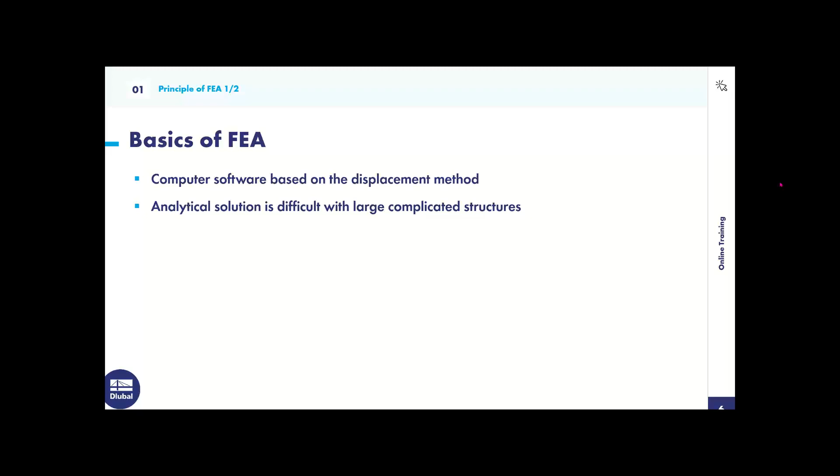The structure within an FEA is converted to a finite interconnected element mesh, and then the material and cross-section properties are given at each finite element node. Once that's done, the mechanical behavior is transferred between these elements.

A word I'd just like you guys to remember or walk away with is discretization. This is where the structure, or the submeshing, is being submeshed into finite elements.

Now we can go through the FEA calculation workflow. First, the determination of the local element stiffness relations, or properties, is determined. Then the program changes the stiffness relation at each node to the global coordinate system. Then the entire structure is assembled. Fourth, the support conditions are implemented into the structure. Then the displacement vectors are determined. Lastly, the support forces and internal forces are then determined.

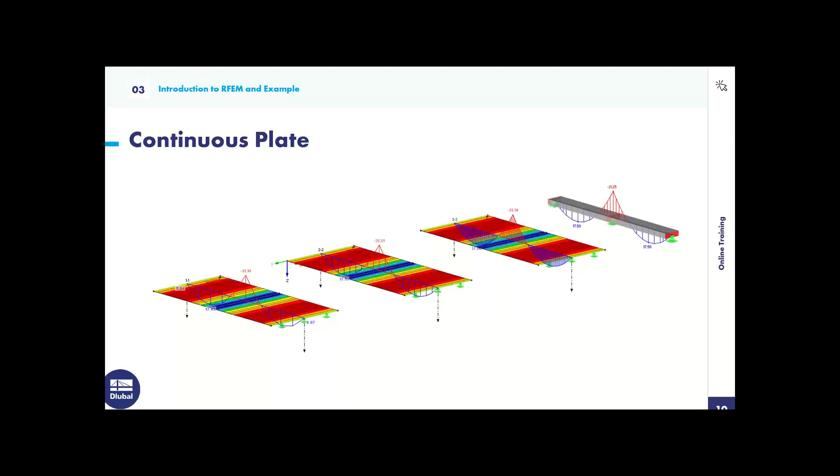So to start off, RFEM is a structural analysis software capable of analyzing plates, members, and solids. Deformation, stresses, and internal forces can then be calculated for a 3D structure.

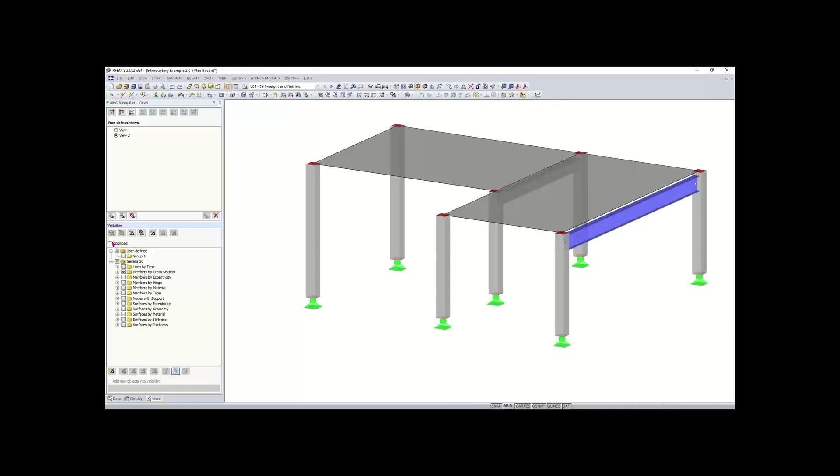So within our views tab, we can create visibilities based on these options down here. So if we turn on visibilities, we can create visibilities based on member cross-section. So right now, if I only wanted to show my W18x50 here, I could do that.

Maybe I only want to show my rectangular columns here or rectangular cross sections, my 12 by 12s. We can do that as well. And then you can also save visibilities as well, and then pull them up whenever you'd like.

The third tab we would have is our results tab. So if I just run the results for this model quickly, then we will see our results tab, and that will pop up at the bottom here only if we have results ran. So I just ran my load case 1, and if I turn off my visibilities,

and then now you can see in my results tab, this is again similar to the other menus where we have our expanding and collapsing folders. So right now I have global deformations checked off, and we're viewing our resultant deformations. And you can see we get a nice look at that. And then we can also check out our member basic internal forces, as well as our basic internal forces for our surfaces as well, if we would like.

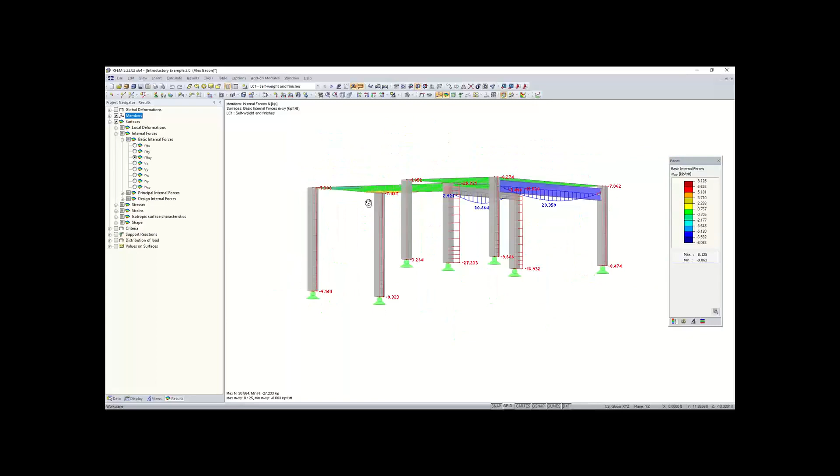If you don't have a scroll wheel on your mouse for some reason, you can use the arrow keys on your keyboard to move the model around in translation. You can also hold control and use the arrow keys to rotate the model as well. And then if you want to zoom in and out with the keyboard, you can use the plus and minus buttons as well.

One more thing before we get into modeling, I would like to just go over highlighting. So real quick, if you highlight from right to left, this will give you a purple box, meaning that anything that touches this purple box will be highlighted and selected. Highlighting from left to right, only things that are fully engulfed into this red box will be selected. So that's the difference between the two highlighting boxes.

So now, before we go into, I can go back to the PowerPoint. And I just have another question to ask before we get into the model. So the question is, what is RFEM? And then the options from A to C are listed. So if you could just answer that, and I'll give you about 30 seconds to a minute.

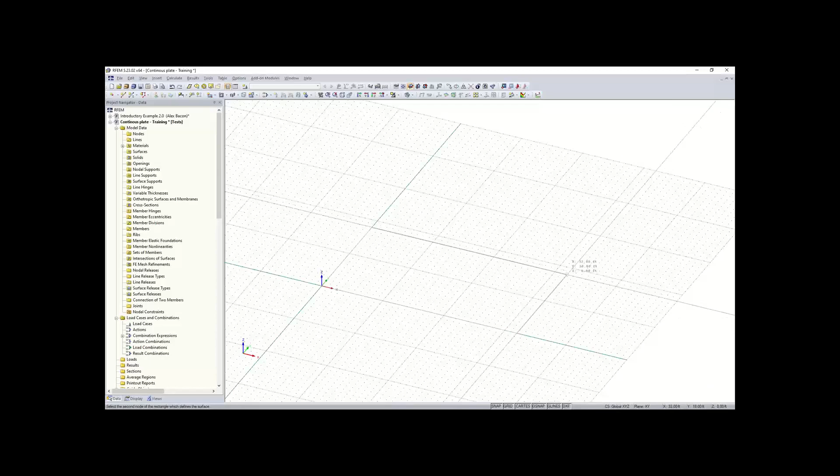So I'll go 32 feet in the X direction, and then 16 in the Y direction. And then I can just click, and you can see that this surface has now been created.

One thing I did want to change, so if you need to edit your surface at all, or anything that you place within RFEM, you can easily edit it by right-clicking on it and going to edit, or you can also just double-click on it. So I do need to change the thickness of this plate to 12 inches. So I can easily just do that by simply double-clicking on it, and you can also see you can change your material and other things as well. So I'll click OK.

And now we can create the same plate again above this original plate. I can just go up here to my rectangular surface tool again. I can click OK. And now I'm going to model a second plate 5 feet above this one. And then I can click and just drag my cursor, make sure that this is 16 feet wide. So that will be right there. So now we have our two plates here modeled within the XY plane. We'll go over work planes later in the training.

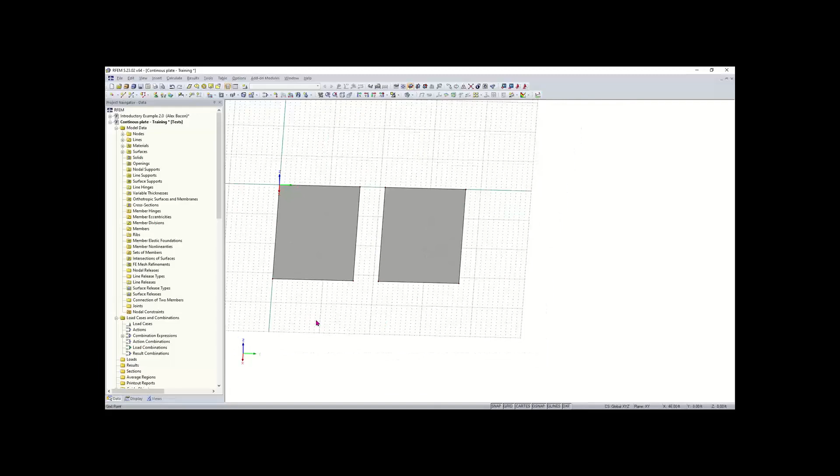So then we can simply create a third plate pretty easily. And to do this, we can use our move and copy tool. So what I can do is I can rotate here, and I can simply just highlight the second plate, and I can right click on it, and I can click move/copy. And what this will allow me to do is I can make a copy of this plate and then just move it wherever I would like using displacement vectors here. What I'm going to do is use this select 2 points and return, and this will give me a displacement vector by selecting the 2 points graphically.

So now I can just simply create one copy of this plate, and then I can create a displacement vector graphically, and I'll select my bottom corner here, and I would like this copy to be 5 feet above this plate. So I'll click that, and I'll click OK. And now you can see that the copy was made, and it was made based on that displacement vector that I selected.

So the next thing we want to do is now we can create our continuous beam. And to do that, basically we're just going to be creating our member. And you'll see that my plate is hanging off the edge of my grid. So to change the amount of grid points that you have, or to expand this grid, we can simply go up here to our settings for our work plane. It's not really a tool. We can click on this.

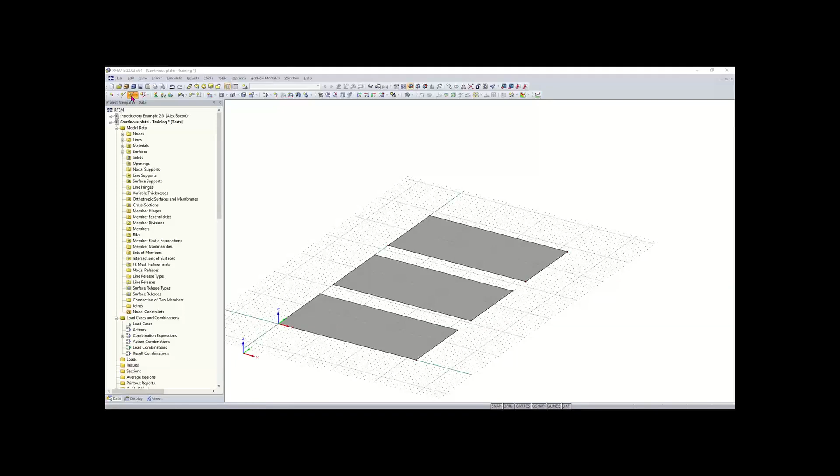And then once we click on that, we have our new member dialog box here. And we have basically a lot of information, but the one thing to focus on is just to input what our cross-section is going to look like. So we can just go over here to this button called Import from Cross-Section Library. We'll click on that.

And then this is similar to the material library, but you can see that we have our cross-sections here. We have rolled, built-up cross-sections, parametric thin-walled, parametric massive, and parametric timber cross-sections, as well as some other options down here as well. Right now, we'll just be focusing on our rolled I-sections here.

Actually, my mistake. We will not be using the rolled I-sections. We're going to be using the rectangular parametric massive sections right here. So we'll click on that. And then once I click on that, you can see that I can enter the parameters for my cross-section, like the dimensions. So I can enter what the base is going to be, which is going to be 40 inches. And then my height is going to be 12 inches.

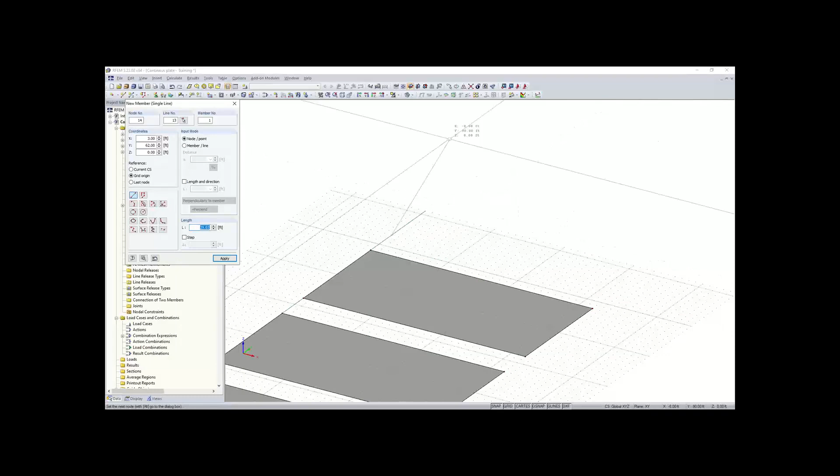And I'm going to add this beam 5 feet away from my third plate here. So I'll left click, and now you can see that I can just draw, you see this line here, I can draw my beam, and it's going to span the same length as our plates here. So I'll left click again, and now you can see that our beam has been drawn. And now we have our 3 plates and our continuous beam right here.

So the next thing we want to do is we want to divide these lines here on the edge of our plates, so we can add a midspan here for supports. We also want to divide this continuous beam, so we can add a middle support as well. So to divide the lines, we can simply just right-click on the line. And again, when you right-click anywhere or on any object, you get this shortcuts menu. So we can just right-click on this line to divide it. And then we want to go up here to divide line.

And you can see under divide line, we have multiple options for dividing a line. So we can do it by distance. And you can see when I pick that divide line option, we have these gray arrows here on your lines. And these arrows tell you the orientation of the line or the direction that you drew the line. So this would be the start, and this would be the end of the line. You can also view these arrows by just hovering over any line that you've drawn.

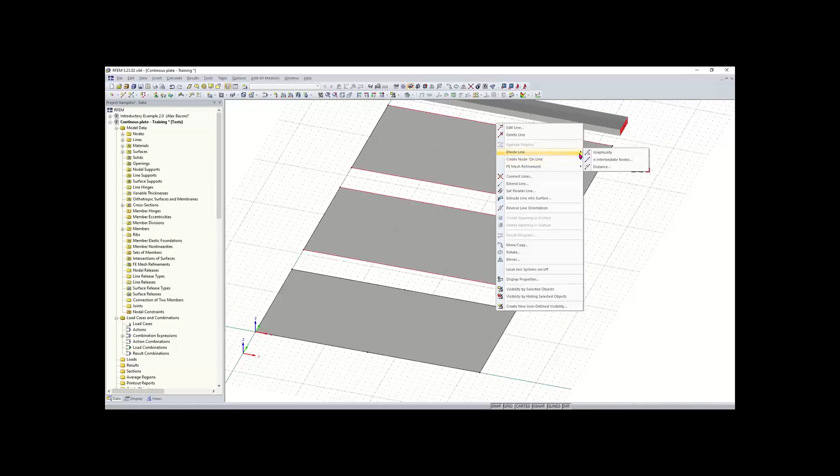So now we can do this for the rest of the lines, and we can easily just hold Control and select the rest of these lines here. Right click. So holding Control and selecting options will allow you to select multiple options. And then we can just do this by a distance again. Everything's set here. You can see the multiple lines have been selected. I'll click OK, and now we have these nodes placed in the middle of our lines here.

Now we would just like to divide our continuous beam up here. It's similar to the lines. I can just right click on the beam, go to divide member, and the first option would be graphically. Graphically just allows you to select graphically where you'd like to place the node. I'm going to place it right in the middle here at 16. And now you can see that our member here has been divided. I'll rotate the model to get a better view.

Now that our members and lines have been divided, for our plates, we can draw a line down the middle of them. The reason we are putting this line down is to later on add a line support there, so we have some mid-span support. So we have an option up here called New Line, right next to our New Single Member button. So I'm just going to click that.

Now you can see this box opens up here, and what we can do is just draw our line within our work plane here. I'm just going to select snap to and select this first node here, and then I'm going to draw it and snap to the second node. You can see we have a nice perpendicular symbol there, letting me know that the line is perpendicular. I can right click anywhere or hit escape to exit out of that tool. And now you can see that our line was drawn.

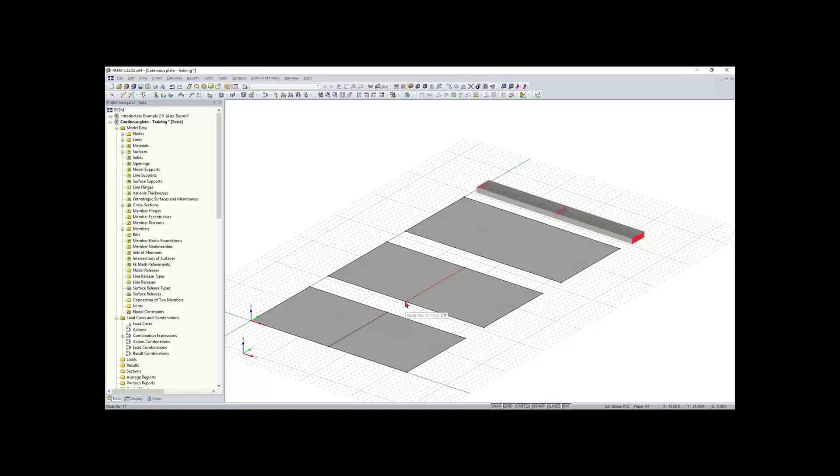So now we can add in the nodal and line supports. First off, we'll add in our line supports for our plates here. To do that, we can go up here to New Line Support. This line support is going to have certain conditions to it, so we can click on this button here called Create New Line Support. You can see here that we have our support conditions down here. Basically, this first section is for fixing your conditions in translation, or you can also fix your degrees of freedom in rotation here.

For this example, we just want the rotation fully released. That's basically all we need to do here in this box. So this will be just a hinge support. We can click OK, and OK again. Now I can simply just click on my lines here, and I can click on the outside here to add supports to the ends. So we'll have two end supports and a mid-span support. And now our line supports have been added to our plates here.

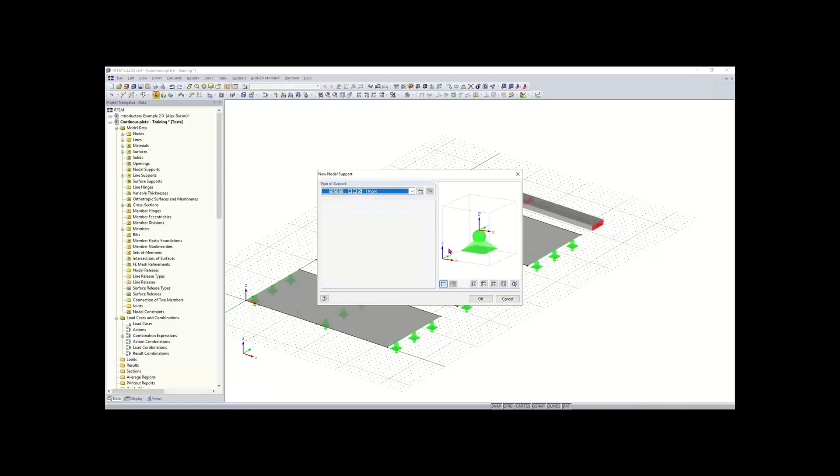Now we just need to add nodal supports to our beam here. We added line supports to our plates; now we want to add just nodal supports. To do that, we can go up here to New Nodal Support. You can see by default that hinged is already selected here, so instead of having to create a new nodal support type, we have hinge selected already. So we can hit OK. Now we can select our first end node here, and then we can select our middle support.

This last end support is going to have different conditions than these two supports here. So we can go up to nodal support and create a new type of support. This support will be the same as a hinge support, but the rotation about the local x-axis will be restrained. I'll click OK again, and now you can see that that support is a little bit different. It can't rotate about the x-axis, so it's locked. And now all of our supports are defined.

So now that our supports are defined, we can get into loading. So now we would like to load these plates in this continuous beam. It is important that we create a new load case because every load within RFEM needs to be assigned to a load case. So I can go up here to either edit load cases and combinations, or we have a button here called New Load Case. So I'm going to click on the New Load Case button.

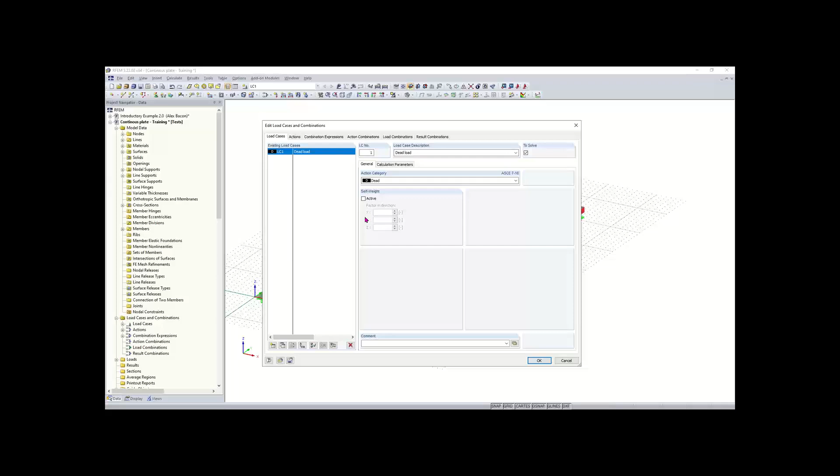So now you can see up here we have our drop down telling us which load case we're under, and you can see I had load cases and combinations automatically generated based off of standards. So now the program has generated some load combinations and result combinations, but we don't need to worry about that right now. We just want to stay under the dead load so we can add loading to these plates and continuous beam.

So the first thing we want to do is create a new surface load for our plates here. To do that, you can see we have a couple loading options right here below dead load. We have some point loads, some uniform loads for members and lines, and then we have a surface load. So we want to click on this new surface load here, and this dialog box will pop up. Again, we can just work through these different sections. Our load type will be a force, our load distribution will be uniform, and for our load direction, you can pick from a couple options. We'll keep ours as global related to the true area in the global Z direction.

Just a quick thing to point out: if you ever see lowercase coordinates, those relate to the local axes, and the global axes are the capitalized coordinates here. So we'll keep that as the global Z coordinate. And now we just want to add a magnitude to our load. This will be a magnitude of 0.21 KSF. And now we can click OK.

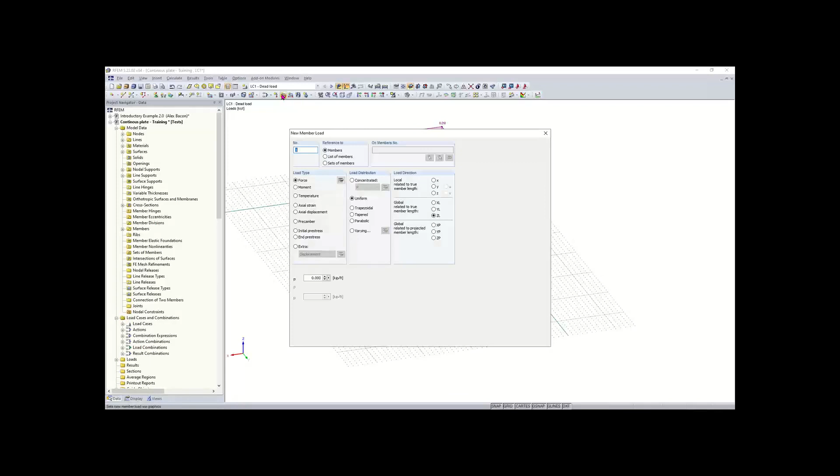And again, this is similar to the surface load, where we will have a force as the load type. The load distribution is going to be uniform, and the load direction, again, is going to be in the global Z direction. I'm going to add in a magnitude of negative 0.21 kips per foot. I'll click OK. And now you can see that my cursor has changed, allowing me to select my two members here.

And now we can just right-click anywhere to exit out of that tool.

Hey Alex, we have a quick question. The question is, how can you quickly edit the load? Let's say you put in the wrong load magnitude. Maybe you can show how to quickly make changes to a load you've already drawn.

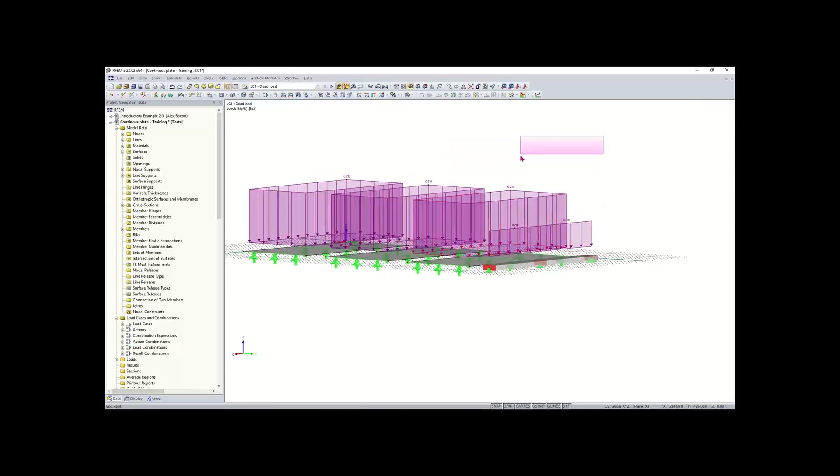If you've drawn your loads and want to edit them, you can simply double click on them, which allows you to edit just one load. Also, if you need to highlight all of your loads or a couple at a time, you can highlight them and then double click on them, which allows you to edit them.

Great, thanks. You're welcome. Now that we have our loading, we can move on to creating FE mesh refinements. Within the program, for surface elements an FE mesh is generated, and right now our FE mesh is set to about 1 foot for the length of our finite elements. We'll get into more of that later if you're confused, but for now we'd like to add an FE mesh refinement, which allows us to change how fine our FE mesh is for individual surfaces.

To do this, I can simply right click on my surface here, go to FE mesh refinement, and then click on new. I'll create a new FE mesh refinement using this button called create new FE mesh refinement. You can see that surface 1 is selected, so I'll click on that.

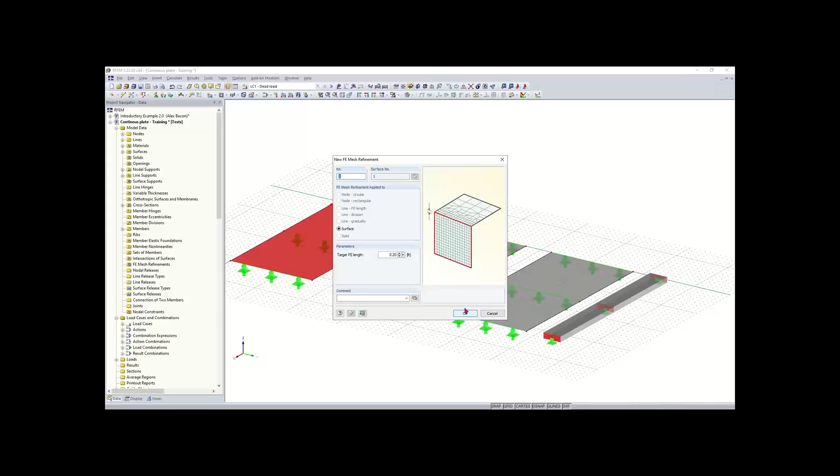Right now we just have the surface selected automatically by the program, and we can set our target FE mesh length. I want to set mine to 0.2 feet. This is smaller than the 1 foot default already selected globally in the program, so I'll click OK, then OK again. Now you can see this icon telling us that an FE mesh has been applied.

Now we want to do the same thing for our other two surfaces. We can right click on the surface and add one, but we can also go into the project navigator on the left hand side, scroll down to FE mesh refinements, expand that, and you can see we have one for surface 1. I can right click on FE mesh refinements and click new FE mesh refinement.

Now I can just click on surface. It's asking what surface I want to apply this to. I can type in the surface number, or select the surface graphically. I'll click OK.

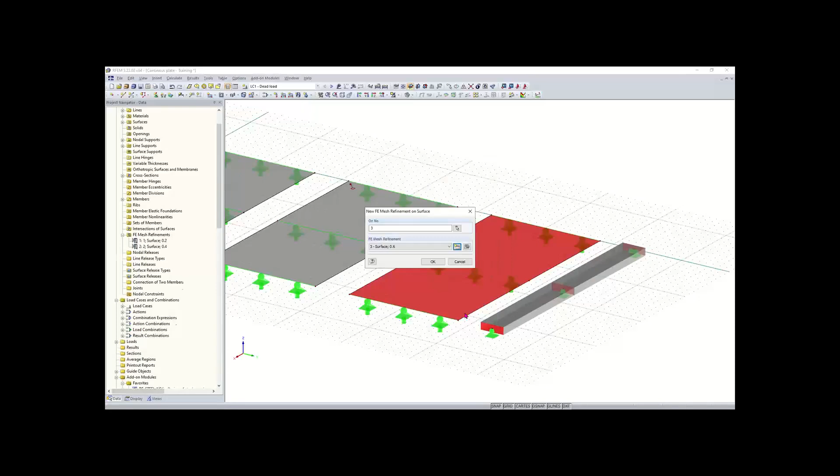For this surface, I just want to increase the FE mesh refinement so we can get an idea and compare results later on to see how our results change depending on FE mesh length. I'll click OK, and again we get that icon. Then I'll do the same thing for the third surface, right click on it, create a new FE mesh refinement, and make this 0.6 feet, so you'll see they'll be increasing down the line. I'll click OK again, and you can see that icon has been placed there.

We have another quick question unrelated to the FE mesh, which maybe you can address quickly. One of the attendees noticed that you selected concrete for one of the materials. They're wondering, what does the RF concrete add-on module do then? How is the add-on module different from RFEM, I suppose, is what you could quickly explain.

Basically the material for concrete has been selected with RFEM here. You'll see later on when I run results that in RFEM you just get things like global deformations, internal forces, support reactions, etc. But if you want to design rebar, to design your slab for reinforcement, that's when RF concrete members or RF concrete surfaces come in. We have two different modules, one for surfaces and one for members. So basically the add-on module is for designing the reinforcement.

I would just add to that, like what Alex said, the analysis is completely within RFEM, and all materials are available to you there for full modeling for the analysis. Then, as he mentioned, the modules are for design. Within the RF concrete modules, you'd find the various standards, such as Eurocode, ACI, CSA standard, to actually do the reinforcement design, which is not done within RFEM.

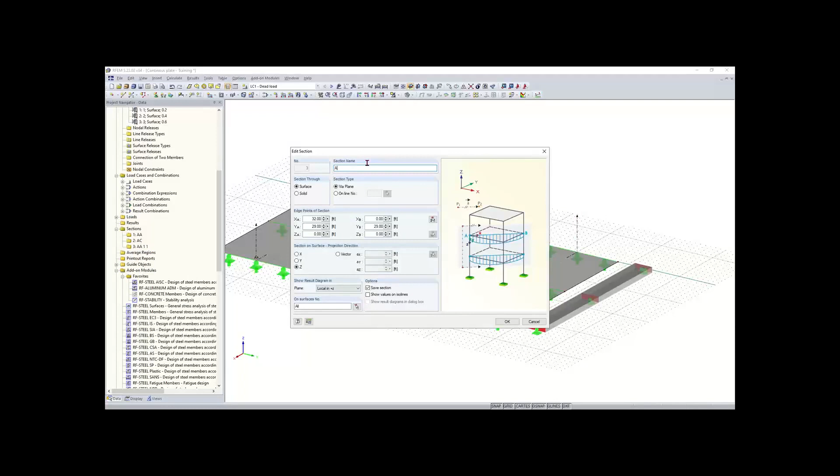Click OK, and now everything is basically ready for calculation. We have our surfaces and members along with our supports and loading. Again, you can turn off the loading—I don't have mine shown right now—but you can turn it on and off with this button up here. I'll turn it off for now.

Now we can go up to our toolbar and click the button called Calculate All. Once we hit that, the program will go through and run the calculations. It should only take about a minute or two, depending on the size of your model and its complexities.

Once this runs, the first thing we should see is our global deformations. Then we can get an idea of our internal forces and things like support reactions. Now you can see we have our global deformation shown, with a panel on the right-hand side that's basically the legend for our colors. We have a max displacement of 0.022 inches.

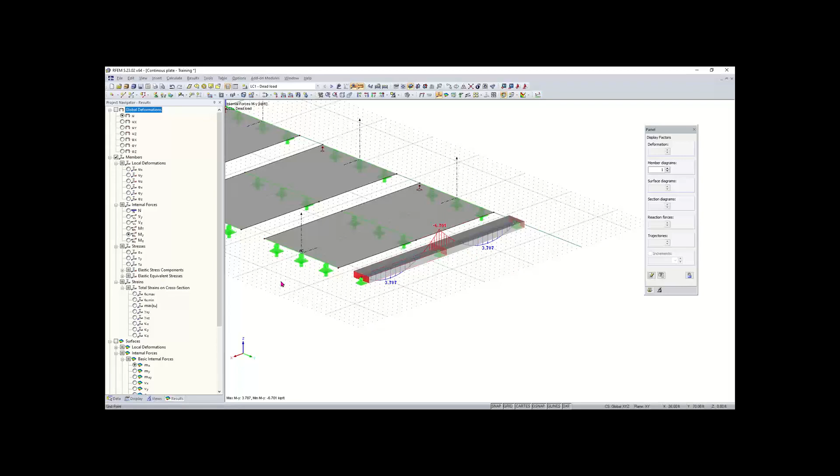And we can also take a look at our internal forces of our surfaces. So we can view the basic internal moments along the x-axis. Again, every element has a local axis, referred to with lowercase coordinates here. If I hover over any element, it'll give me the local axes for the plate. If we want to see the local axes of our member, we can right click on that and click on local axes, and now we will get that for all of our elements here. So I can right click again.

One of the attendees is asking how to find the optimal mesh for the analysis. Yeah, okay.

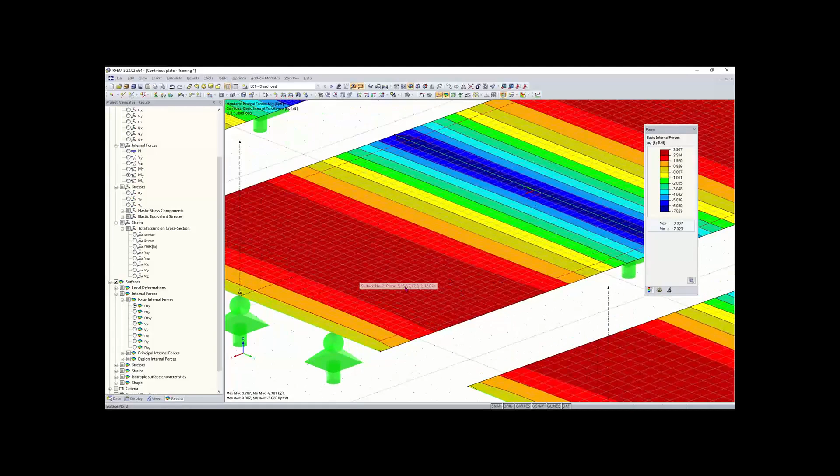So the optimal FE mesh for analysis is a little tricky. There's not an actual specific length that you would pick for your FE mesh for a certain model. Basically what you can do is adjust the FE mesh by going up here to calculate, and you can go to FE mesh settings. These are the global FE mesh settings for your model. Here we have our target length of finite elements, and you can change this. So basically finding the correct FE mesh is just a guess and check. You can take a look graphically if you zoom into your model at the FE mesh and just make sure it looks good. But then also you can run the results of your model with a certain FE mesh length, and then change the FE mesh length or make it finer, and run your results again and compare those results and see how much they've changed. You can just keep doing that until your results don't change, or the difference between your change results is small.

Yeah, exactly as Alex mentioned, it's basically just running a test and trial type process where you continue to decrease the FE mesh. Exactly as he says, if your results are changing significantly, then you know your FE mesh is not refined enough. The other thing I wanted to point out, if Alex, you can go to calculate FE mesh settings again, the third tab is called adaptive mesh refinement. This is something we're not going to get into today, but essentially the program will run that testing process for you. You can set the number of iterations, the load case or combination to consider, and the program will run a quick analysis in the background, check the results, and then refine the FE mesh in certain areas of the model, essentially creating the FE mesh that is optimal for your model. So this is a way to automatically do it. To manually do it is exactly as Alex had mentioned. So hopefully that answers the question. Thanks, Alex. You're welcome. Yeah, that's awesome to point out, it's a good tool to use.

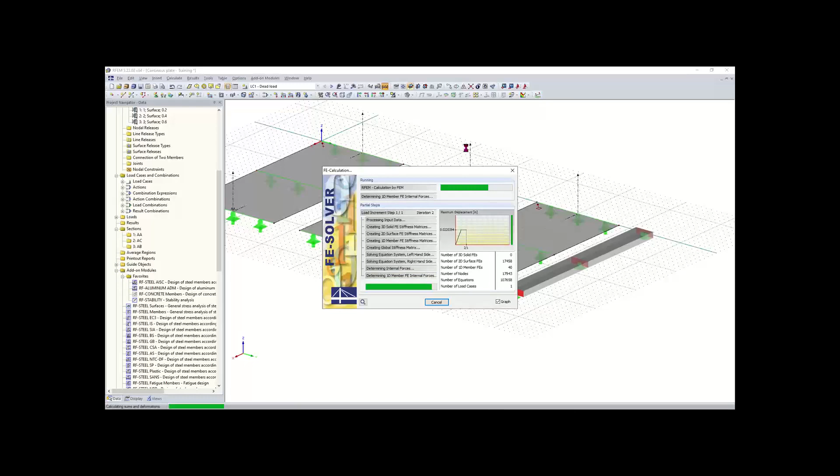So basically, this is because the methods used in school assume an infinite shear stiffness, when in reality there are some shear deformations for bending. So just keep this in mind when comparing hand calculations of deformations with RFEM.

So now back to the PowerPoint, we can go over some plate theory. So basically, these first theories are going to be analogies for beam elements. The first theory is Bernoulli's, and the second theory is the Timoshenko theory.

The assumptions made for Bernoulli's are that the cross sections always remain in plane and are perpendicular to the member axes. The second assumption is that there are no considerations of shear deformations, and that the shear stiffness is completely rigid for our member.

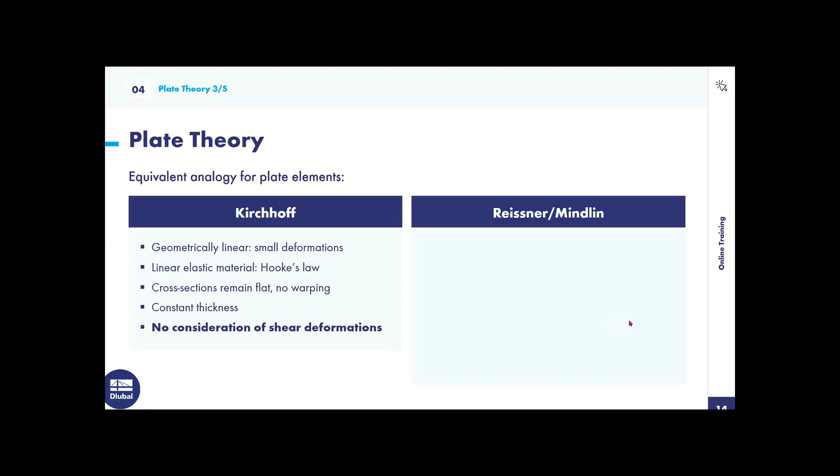For the Reissner-Mindlin theory, we assume basically the same as the Kirchhoff theory, but the only difference is that shear deformations are considered, and we consider transverse and lateral strains. If we move to the next slide, we can get a better look at what considering transverse/lateral strains means.

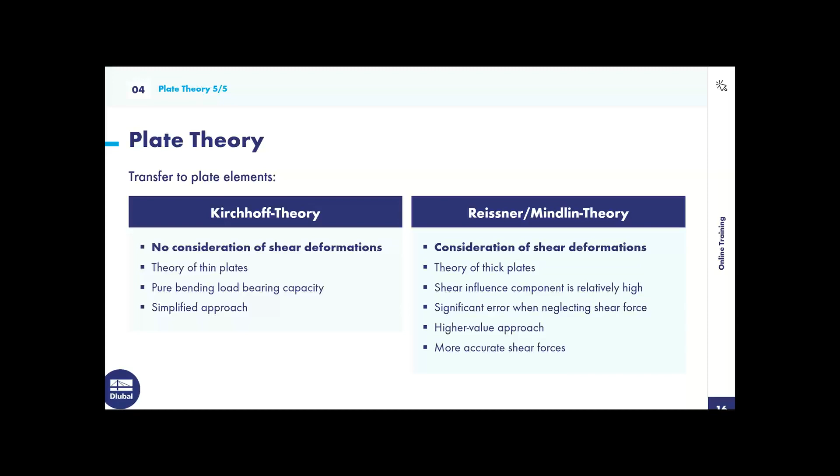So now what we can do is move back to the program. Within the program, we can go to calculation parameters. And once we open up calculation parameters, you will see that under options here, the plate bending theory is by default set to Mindlin. So this theory, like I said in the PowerPoint, takes into consideration shear deformations. So we can just keep that the same, or we can also change it and get a view of how the results change.

So we'll change it to Kirchhoff, and so we won't take into consideration shear deformations. Before we click OK, maybe get a quick glance of what these results look like. And then we can click OK. It's going to ask me to delete the results because I changed that theory. So I'll click yes. And now I'll rerun my calculation. It'll run the calculation based on the Kirchhoff theory.

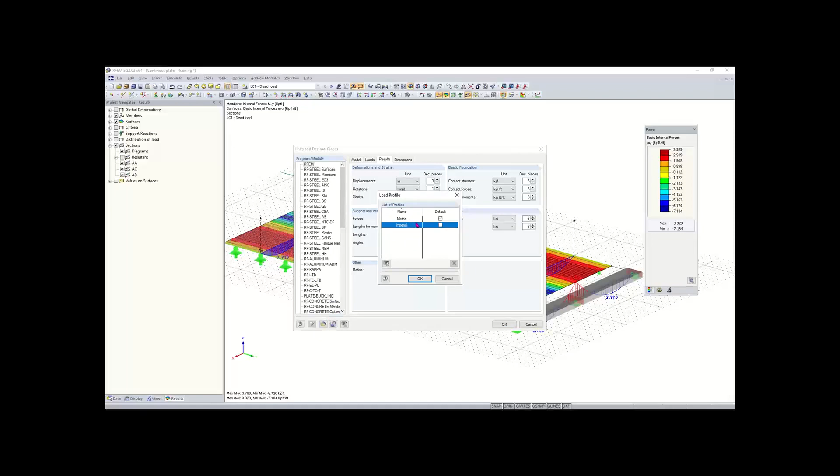So you can change the units of your results, and the units in general, by going up here to options, and then to units and decimal places, and this dialog box will pop up, and within here you can change the units of pretty much any result. Up here you have tabs, and you can go to results, and here you have deformations. You can change the results of your internal forces here. You have a drop down, you can change between any of these units if you like. You can also change your decimal places as well. And if you want to change between imperial and metric, you can do that at any time throughout your modeling as well.

So those results ran, and maybe you can remember a little bit from the results before, but you can see that they've changed slightly, maybe by 0.1 or 0.2 kip per feet.

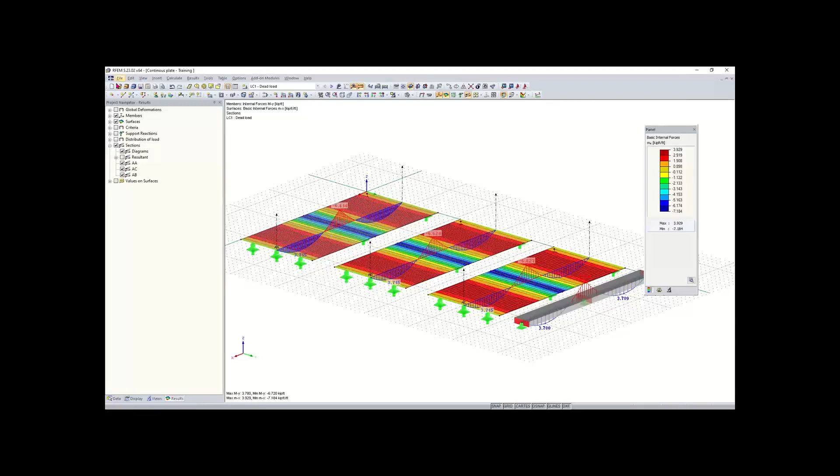So what we can do is we can open up a new model. We can also save our model for our continuous plate by hitting the Save Model button up here. And that'll save our model. And now what I can do is I can click on New Model.

And within this new model general data tab, like I said before, we can just type in our model name. So I'll just name this one Euler case 1, example training. We don't have to add a description. We don't really need to generate combinations automatically. So it'll also be a 3D model, and everything here is set by default, so that's good. So we'll click OK.

And now we have our blank workspace here. So what we're going to do is just create one single member, and this is just going to have a new cross section. So what I can do is go up here to new single member. I can click on that, and now I can create my cross section here again. So I can go to import from cross section library. And then it's going to be an I section. So I'm going to click on I section.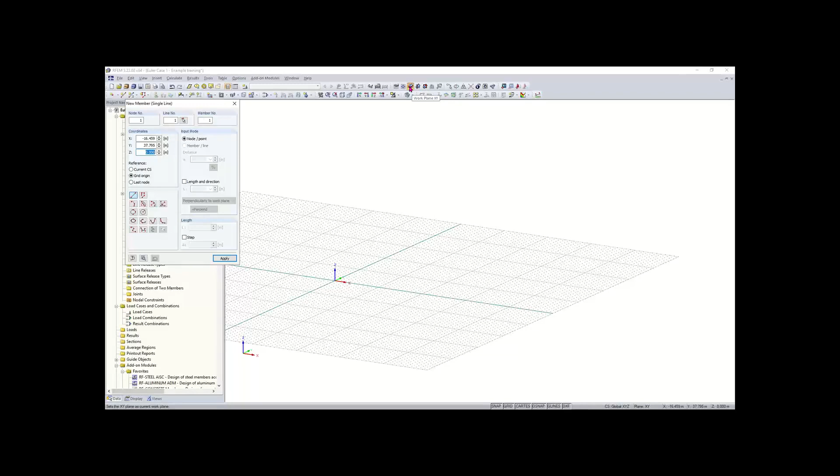And now I can draw my member. So maybe I want to draw my member perpendicular to this grid here. What I can do is I can check off this box here called length and direction, and I can set this perpendicular to work plane if I want to draw it perpendicularly. Or what I can also do is just change my work plane up here using these buttons. So right now it's set to work plane in the X and Y plane. I can change my work plane to the YZ plane, or I can change it to the XZ plane.

I'll keep it on the XZ plane, and now I can just select my origin here by left clicking, and I want this column to be 30 feet high. So what I can do is simply just go up here, left click, and now my column has been drawn. I can right click to cancel out of this, and now our column has been drawn.

So now the next thing we want to do is just add in a rigid support. So I can highlight from left to right this node here. I can go up to nodal support, and right now it's set to hinged. Instead of having to define a rigid support, what I can do is just hit this drop down and select rigid, and you can see that all of the degrees of freedom here from translation and rotation are all fixed with these check marks. So now I can click OK, and I can zoom in here and you can see that my rigid support has been added.

And now our Euler Case 1 has been created. And what I can do is create a new load case for it. So because I need to add in loading, I can go up here to new load case.

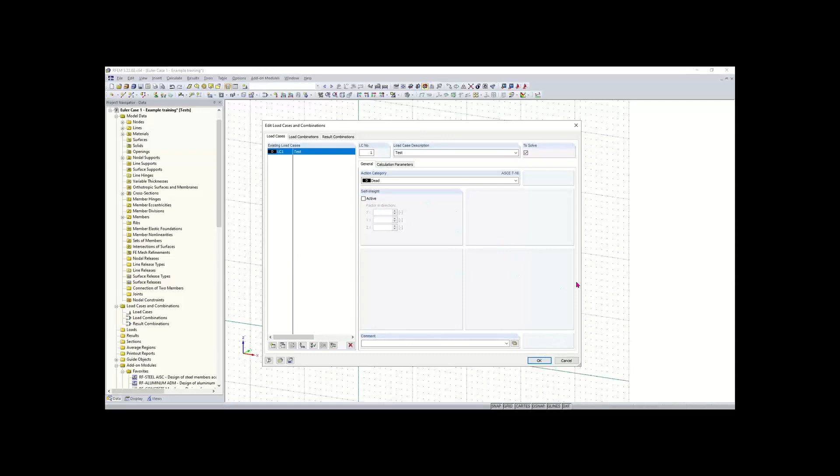And I can just name this load case test. And the action category is just set to dead. Again, we're going to deactivate self-weight just for hand calc reasons. Normally you want to keep self-weight activated at all times for design. So we'll click OK.

And now we can create our new nodal load. So to add a nodal load instead of a member load or surface load, we have a button here called new nodal load. We can click on that. And this box should look pretty simple. So we have our node selected up here. And then we just want to tell the program the force and what direction it's going to be in.

It also looks like I'm still in metric, I have kilonewtons, so let's change that down here in this units button at the bottom. So I'm going to just change this back to imperial. I'll click OK. Oh, it's asking me. Yep.

So for this load, we're going to add in a -5 kips in the z direction. And you can see that loading has been shown here in the graphic. And then also I want a lateral load in the x direction of 2 kips. So we'll add that. We'll click OK.

And it looks like I had my node down here selected before I went into my tool up here. So what I can do is I can just double click on this loading and change the node. Or I cannot change the node there, so what I can do is just drag this loading to this top node here, and there we go.

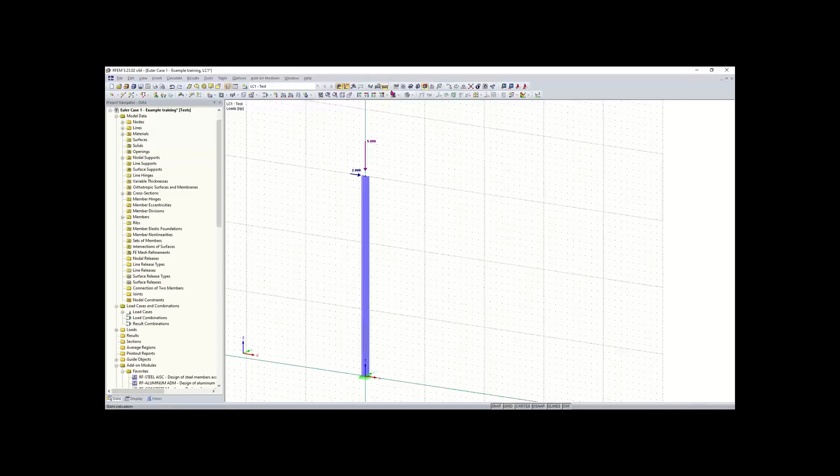And now what I want to show you is something important. This is very important for calculations of structures within RFEM. What I can do is click on Calculate All, and I can run the calculation for this column. And now you'll see that my deformation is shown here, my resultant deformation.

I can also go here to member and again show my internal forces. I can show my moment about the local y-axis here. I can get an elevation view of that. And we can take a look at our deformation in the x direction, 3.782. That's 3.782 inches. And now I want to show you how this linear or first order calculation differs from a second order calculation.

So just to clarify on that, if I go to edit load cases / combinations, and we're looking at this load case that we've just put loading on and we've created. If I go over here to my calculation parameters, you can see we get our method of analysis right here. So generally, load cases are calculated based on a first order analysis, and load combinations, which we didn't get into, are calculated based on a second order analysis.

And maybe you recognize this information from the name P-delta. So the second order analysis takes into consideration large P-delta and little p-delta. And what we can do is we can change our load case to a second order analysis. And then I can click OK after doing that. So basically a first order analysis defines the equilibrium of the beam based on the undeformed system.

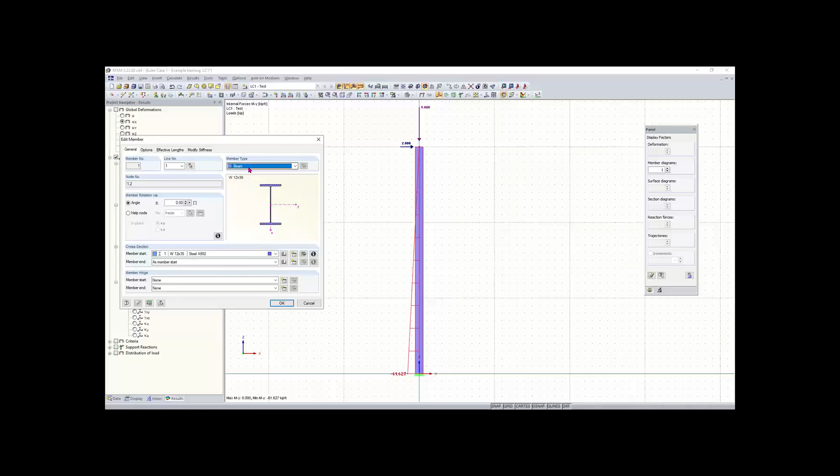Maybe we can quickly go over member types, just the basic ones. If I double click on my member here, you can see that my member type is set to beam. That takes into account beam or column. We also have rigid for infinitely rigid stiffnesses, and we also have ribs and truss members, but we won't get into any of these types today, but they're good to know. If you're designing or drawing a beam or column, always keep the member type as beam.

So now we can change the loads at any time. This will erase our results, but I'm going to change my loading to only 100 pounds in the axial direction. I'll double click on my loading here, and change this to 100 pounds or -0.1 kips. And I'm going to set my lateral forces to 0. Click OK. Now you can see that the loading has changed and decreased.

Hey, Alex, quick question. Yeah. I know you showed this at the beginning, but we had a question. If you could just review again how to automatically account for self-weight.

Okay, yeah. I know I've been turning off self-weight or not accounting for that throughout the training. But if you want to automatically take self-weight into consideration, I can go back into my load cases and combinations here. Under dead load, the action category will always have self-weight activated by default. What this means is for this load case, a -1 factor is going to be applied to the self-weight of the structure, and that's going to take into consideration that force being applied to your structure.

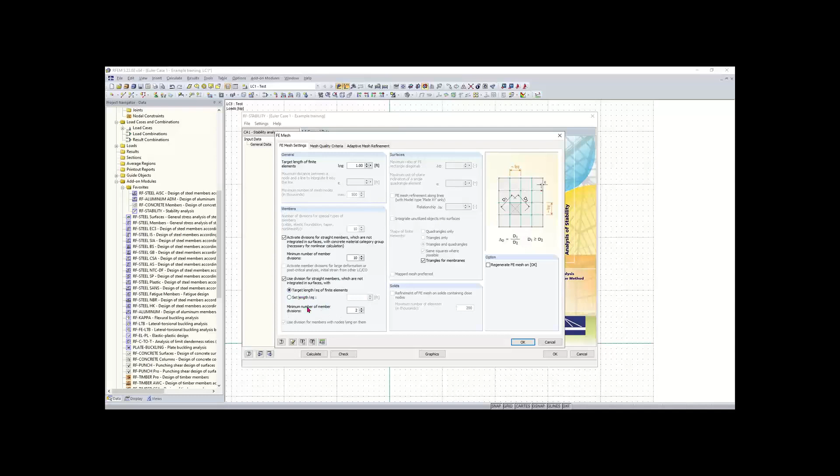To increase accuracy, the only thing I want to change within these options is the minimum number of member divisions. Instead of 2, we're going to set that to a value of 10. Then I'll click OK. Now we go back to our stability, which I did by clicking OK. It is important to change that value from 2 to 10. And now I can hit calculate.

So once I hit calculate, RF-STABILITY will take my internal forces, members, and cross sections of materials, and give me a load factor and a magnification factor here for my different eigenvalue numbers. The critical load factor is the amount you would have to multiply the loads by in order to get an unstable system.

Or you could look at it as a total percent of the loads your structure can take. So basically right now my structure could take 135 times more loading than it is taking right now. And then we have our effective lengths in the next results down here.

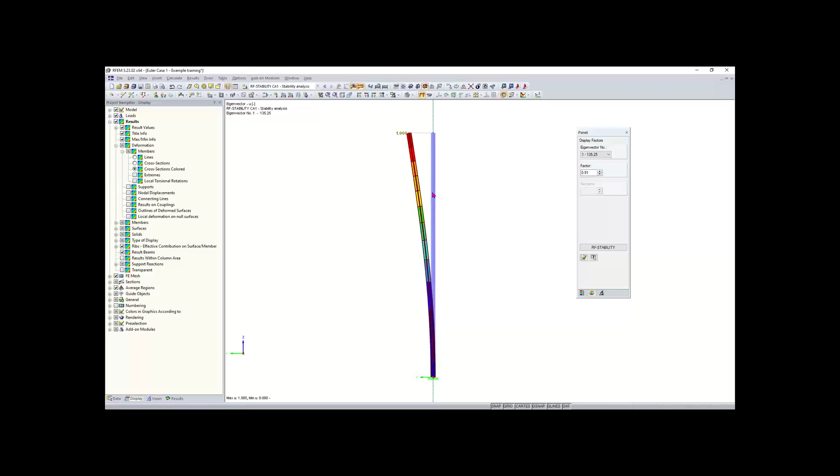I think it is clear also that the column will first be unstable in the weak axis direction. So basically the axis of this column is in the y direction, or about the local z axis. So what I can do for clarification is just turn on my local z axis. This is because the smallest moment of inertia is in the y direction, or about the local z axis.

And to double check that, I can double click and go to info about cross section, and you will see that my smallest moment of inertia here is about my z axis, 24.5 inches. That gives us an idea of our moment of inertia there, giving us our weak axes.

And now we can jump back to our stability by simply clicking on our stability here, and we can take a look again at our effective length factor by going to effective lengths and critical loads. So we have our weak axes and strong axes for both our effective length and effective length factor.

We also can show you what it looks like if the structure is unstable. So maybe you have a structure that's unstable because the loading is too high. For example, what I can do is click OK.

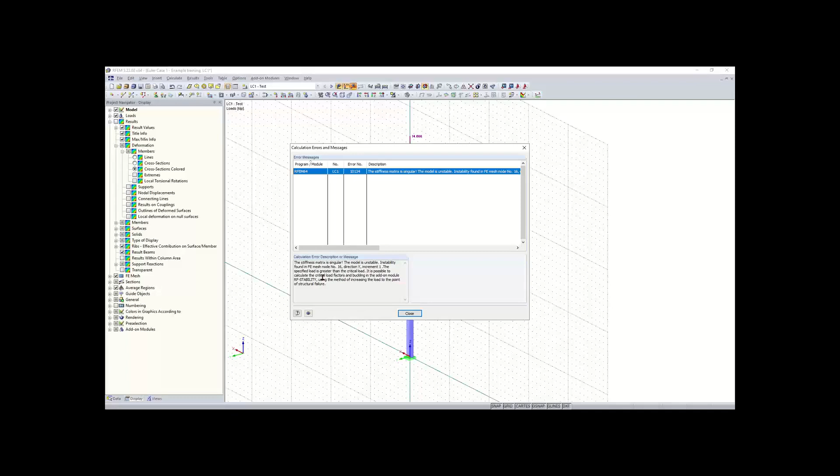Keep in mind, I also still have P-delta or second order analysis on, so you'll see something like this: an error message, calculation errors and messages. It'll say something like the stiffness matrix is singular, and it'll explain that it's not possible to calculate the critical load factors and buckling in the add-on module RF-Stability. So what we can do is close out of that.

The first thing you want to do is make sure that your load cases are being calculated based on a first order analysis. I want to change mine back to a linear analysis. So now that I've done that, I can jump back to our stability.

And within our stability, I can keep all this the same. You'll see that the load case/combination that it's referring to is LC1. I'll click calculate.

And now once that's done calculating, you should see that my critical load factor here is below 1. So basically, since my critical load factor here is below 1 at 0.966, that means that my structure can only take about 96-97% of the loading that is applied.

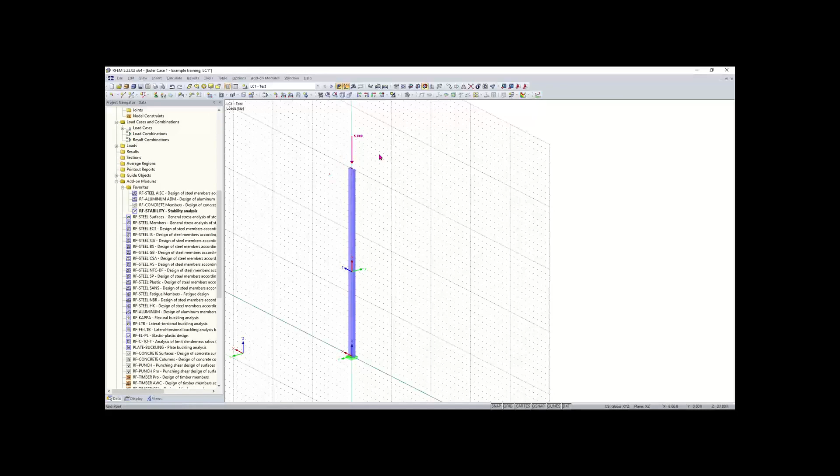Now I want to change the height of our column. If I want to change the height of this column, I can simply highlight this node, double click on it, and then change the height by easily changing the z coordinate to 10 feet. So this will be the height of our moment frame. Actually, before we do that, let's save this model—this will be our Euler case 1 model.

Then what I want to do is go to File. I want to save a copy of this model. I can save this copy as our moment frame. And then what I can do is open that copy.

And now we can turn this column into our moment frame. So I can highlight again this node, double click on it, shrink this to 10 feet. And now I just want to make a copy of this column. I can just highlight the whole thing, hold Control, and then simply drag this column.

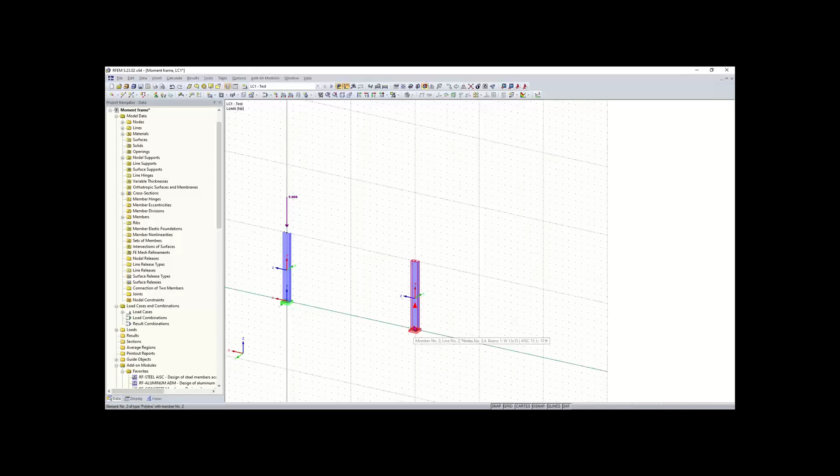I want to make that 10 feet in the negative x direction, or also we can change that—so I want to make that in the positive x direction, and it's going to be 10 feet away.

And then what we can do is create a beam spanning between our columns here. I can also just hold Control—actually, I can Control Z to undo that. What I can do is just hold Control and move this loading over. And now I can draw a beam that will span between the two columns.

This beam is going to be a W8 by 15, so I'm going to import that from our cross-section library. I'm going to go to I sections, and then go down to 8 by 15, leaving all these filters the same. So that'll be an 8 by 15. I'll click OK, and now we can draw our beam here.

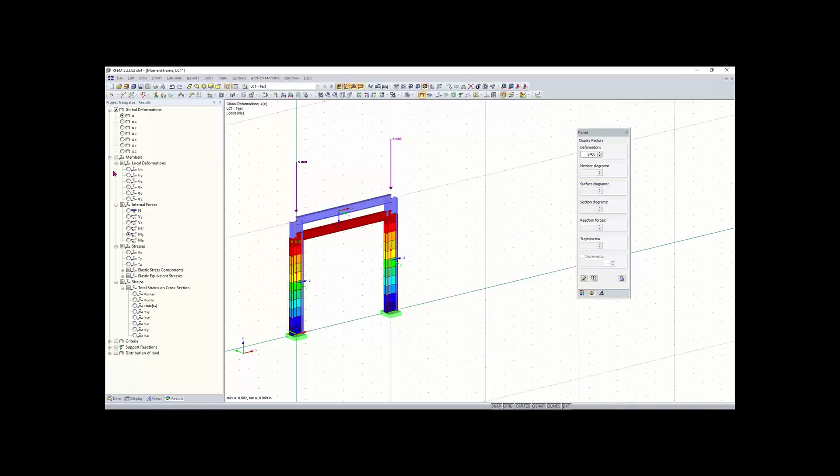And now we can get our global deformations and see what those look like as well. We can also take a look at our internal forces by checking off members here. So we can look at the axial forces.

And then if we want to get a better idea, we can also add in some lateral forces as well—so we can add in 2 kips in the x direction for both of these, and rerun our calculation.

So now we can get a look at our moments from our lateral loading, and then we can also go down here and take a look at our support reactions. So we have our support reactions here, and we can also get a look at our moment reactions as well. And those are defined based on the double arrows here.

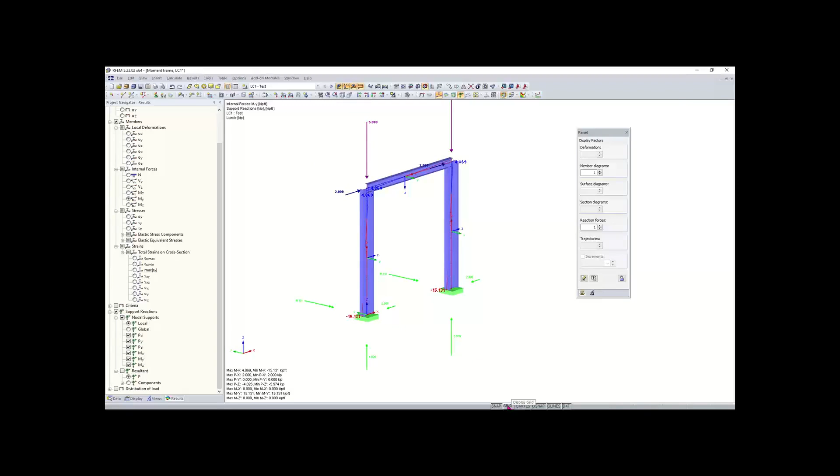Another good thing is you can turn off your grid as well if you just want a cleaner view of your results. You have these buttons down here to turn off your grid.

And then what we can do is go to our stability, and then we can take a look at our critical load factors. So we can hit calculate. And we can see that our critical load factor is pretty high, which is good.

We can check out our eigenvectors. We can get an elevation view of that, and we can cycle through these. You can see we have some out of plane deformation, so maybe this frame will have some lateral supports, some pinned lateral supports up here to keep it in plane.

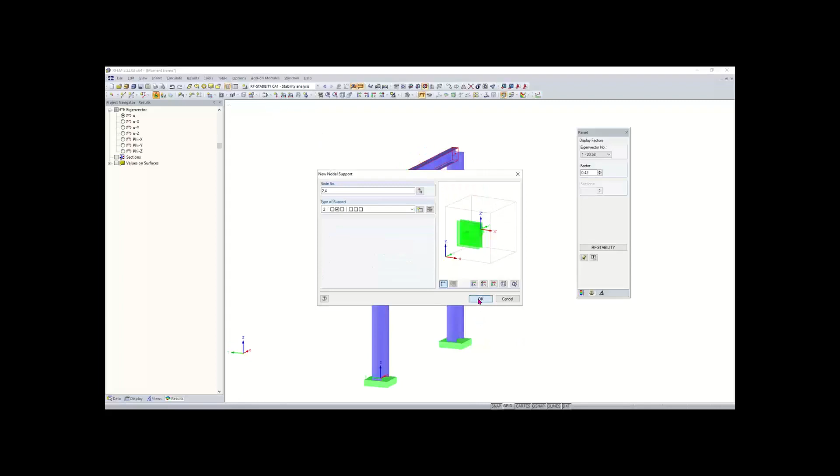So what we can do is hit new type of support. And then this support would allow it to move in the Z direction and the X direction, but keep it in plane in the Y direction. And the rotation for this pin support will be all released. We'll click OK again, and then we can hit calculate.

And RFEM will run through these calculations again, and then we can take a look and see how our eigenvectors have changed based on the supports we added here. So you can see that we don't have any out of plane deformations at the top here. And also I'm sure our critical load factor has changed. It has increased from 20 to 164, so just adding those supports has helped a lot.

And so that's the end of the calculations and modeling for our Euler case 1 example and for our moment frame.

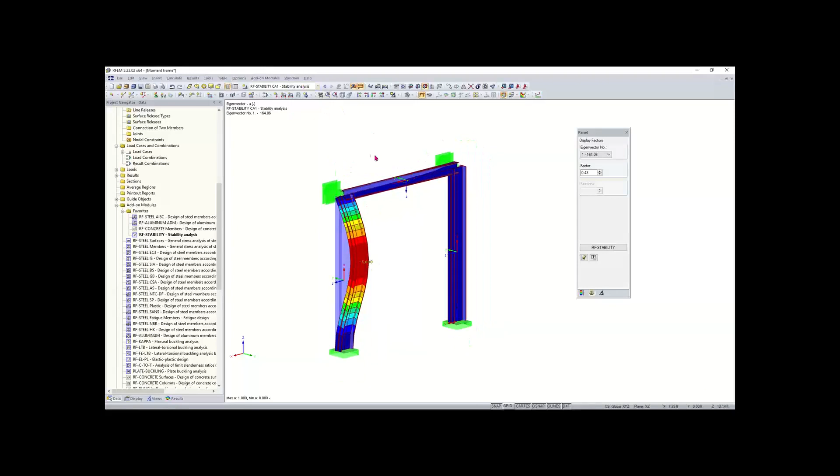Do you just want me to go over how to apply those? Yeah, I think I'll just explain to the user quickly that the lateral loads can be applied the same way as gravity loads. So Alex has been applying loads in the global X, Y, and Z directions. So lateral loads would be in the X or Y directions. You can see here 2 kips, for example, is in the lateral direction. So that should answer the question.

Yeah, and so when you add a new nodal load, when you click on new nodal load, you'll see that you have options for the X direction where you can add your lateral loading in, and then you can see how the lateral loads work with the global coordinate system up here and everything. So yeah.

To specify wind and seismic loads is what he was looking for, and seismic loads can be done through our add-on module RF Dynam Pro, which Alex won't be able to get into today, but we definitely have plenty of resources online that can answer that.

Wind loads, Alex, you can show how under the tools generate loads, and then there is the option here for wind and snow loads according to Eurocode primarily and the US codes. But these are really for general rectangular structures. So if you have anything outside of a rectangular structure, you'll need to manually apply it as we've been showing. Yeah, so I think that should answer that question.

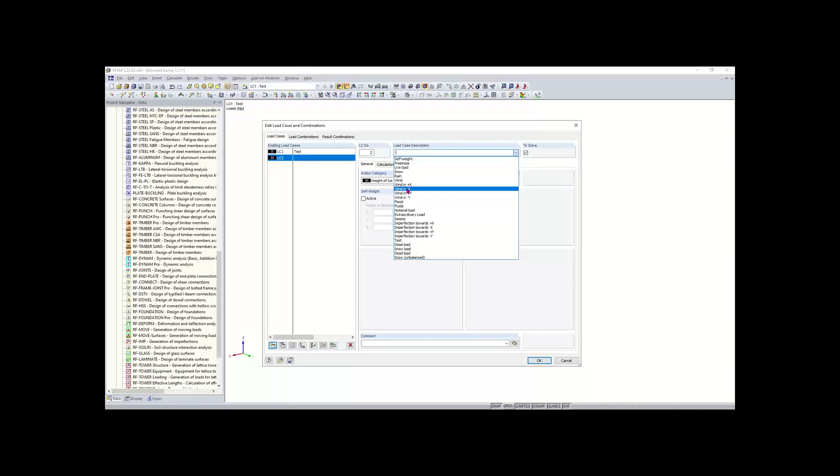Yeah, so basically, like Amy said, those are basically for pitched roof or rectangular buildings, but I guess you can also just create a new load case as well, and then just create your wind load case and add in your lateral loads or lateral uniform loads as well.

Another quick question, going back to the beginning, when you create a new line or maybe a new member, how do you modify if you notice your dimensions are not accurate? Yeah.

Yeah, so creating a new line, again, you can use this tool. If the dimensions are not accurate, I guess I would interpret that as the length, maybe, or if you're talking about the length is not accurate. Yeah, I think just showing how to modify node coordinates or dragging and dropping, multiple options.

Okay. So right now the cursor when you click is always gonna draw the line in the grid that you have placed. This is the work grid, and right now mine's in the XY plane, so I'm gonna draw in the XY plane. Maybe if you click and then you just want to type in your coordinates up here, you can do that, and you can just type in the coordinates you want the end of the line to go to.

Also, you can see my length is highlighted right now as 9 feet, but if I just want to type in 10 feet and I don't move my mouse at all, I can hit enter and that'll give me my magnitude in the direction I have it pointing. So yeah, those are just a couple options when doing new lines.

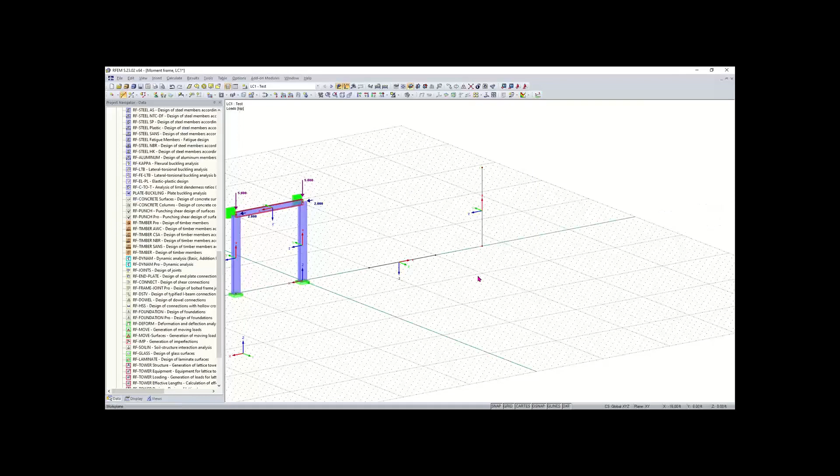Another good option is to check off the length and direction here, and then I can just type in, I don't know, 10 feet, and you can see that my line will be placed perpendicular to my work plane here as well, if I click. So yeah, those are a couple options for creating new lines.

Okay. I think that answers a majority of the questions for now, and we'll just continue to ask them as they come up, or I'll answer them individually. Okay, awesome. Yep, good questions. Thank you, Amy.

So back to the PowerPoint real quick. We'll be modeling this concrete model, and we'll just start going through this. We might not be able to finish it, but I think it goes through a lot of great methods to modeling, and good tips and everything. So we'll just go back to RFEM. And now that RFEM's up, we can simply just create a new model.

What I can do is go up to the new model button. And once I click that, again, we have our general data where I can just enter the name. I'll just name this one concrete model training. For this model, we can keep everything the same. For this one, I would want to generate combinations automatically based on the standard.

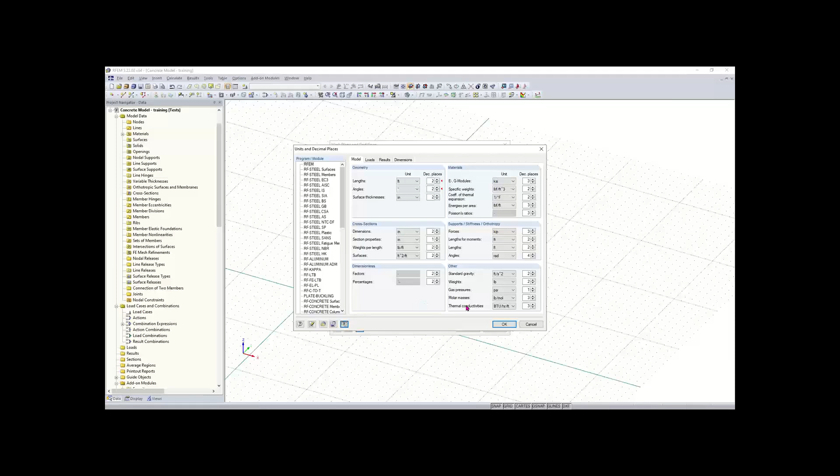Actually, I'm in metric right now. I think I set my program to default to metric in the beginning, so let's change that. We'll go to, again, load save profile, and if you want to change the default units, I'm going to check imperial, click OK, and then this button right here sets your default, so I'm going to set my default as imperial, click OK, and now you can see that my spacing should change to 1 foot by 1 foot. There we go.

So yeah, these grid points, you can change the spacing of them. I'm going to leave them as default as 1 foot by 1 foot. And now I can begin creating my slab, my floor slab for this building.

So I also want to turn off another option that we have in the program. If you right click, you can see this option that says auto connect line / members here. I'm going to turn that off. That's on by default. And what that does is when you have a line intersect with another line, the program will automatically separate those lines into separate members and connect them and add a node. And you'll see a better example of that when I get into creating the walls.

So I'm going to go up here to new rectangular surface. And now I have my thickness here. I'm actually going to keep that as 8 inches. Again, we have our materials. So I'm going to go to import material from material library. And I want to make this, again, concrete. And I'm just going to make it 4,000 PSI concrete. I'll click OK. And I'll click OK again.

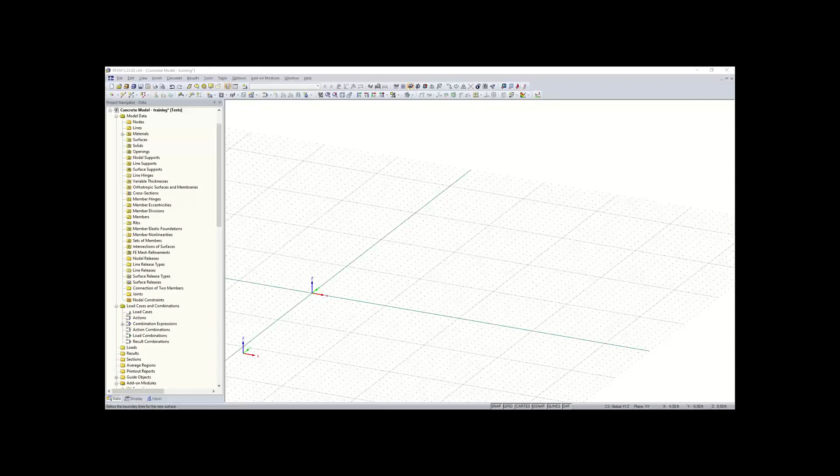And now I'll click on my origin here. This slab's going to be 46 by 40 feet. And instead of having to rotate my model, I can just hit the top-down view here, and I'm going to hit reverse in Z direction, so I'm looking from top down, and then this is going to be 46 feet in the X direction, and 40 feet in the Y direction in the height. So I can move that up, 46 by 40. And I can right click anywhere or hit escape, and now you can see we have our slab here.

So now that we have the slab or the floor, we can work on adding in our columns. The columns are going to be perpendicular to the slab. And I think the best way to do this is to simply highlight our corner node or our origin here. I'm going to make a copy of this node. I'm going to go to move and copy. I'm going to make one copy of that node, and move it 2 feet in the X direction and 2 feet in the Y direction. I can click OK, and you can see I made one copy, 2 feet in the X and Y direction. So that'll be the placement of our first column right there in the corner.

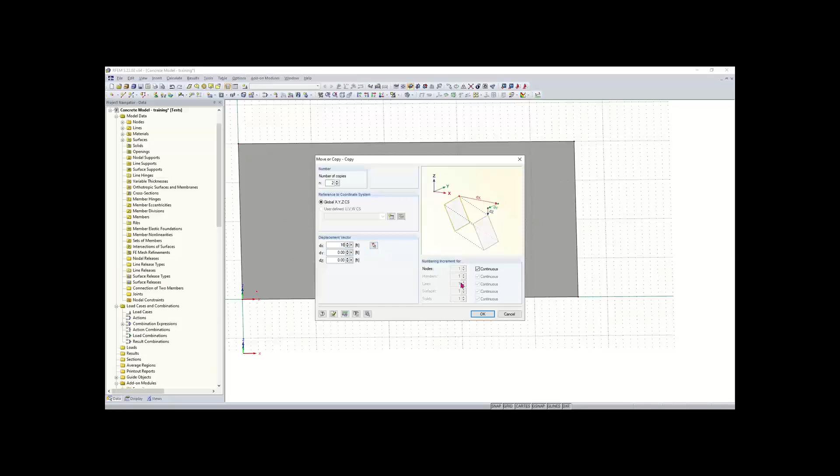And now I want to do the same thing for 2 more nodes. I want them to go in the X direction. I'm going to click on that node, go to move and copy again, and make 2 copies of that node. I only want it to go in the X direction, so I'm going to type in 16 feet, and click OK. And now you can see I made 2 more copies in the X direction, and these nodes are going to be the base of our columns.

I want to have one more column here at the corner. This is going to be symmetrical, so we want it to be 2 feet away from this node here. What I can simply do is hold Control, left click, and move it over there. It might be hard on your side to see, but there are grid points here that I can snap to as well. So there we go. We have our first row of nodes that are going to be our columns.

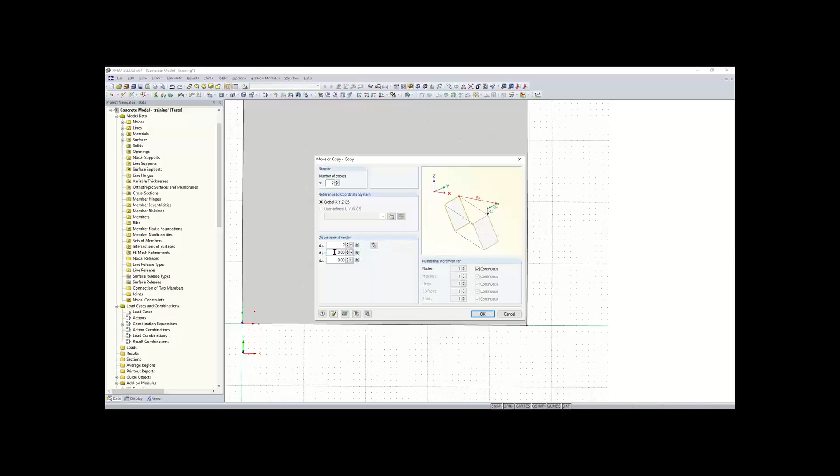And now I'm going to have 3 rows of columns here. So I can rotate this model or this floor here. And then I'm going to hold Control and select my nodes, and make a copy of those. The move and copy tool is pretty useful. So we can make 2 copies of this row of nodes and move those 13 feet in the Y direction. I'll click OK. And now you can see that we have our additional 2 rows there.

So after that, the arrangement of column nodes is right here as follows. Something else I would like to mention is just under the display tab: once you have a large model and it includes a lot of different nodes and lines and elements, if you go to your display tab here, you can check off numbering, and this will just give you numbers in your work window. So you can see I have line 4 here and then different numbered nodes. So it makes it easier just to stay organized, and also for reference as well.

So now we want to define our walls. And to do that, we can simply divide our lines here like we did with the plates earlier. So we can right click on line 4 here, and what we want to do is go to divide line and then go to graphically. And then this wall is going to be placed right next to this node here. So I'll left click and divide that line. And now you can see I'm still in the divide line tool. I can right click out of that.

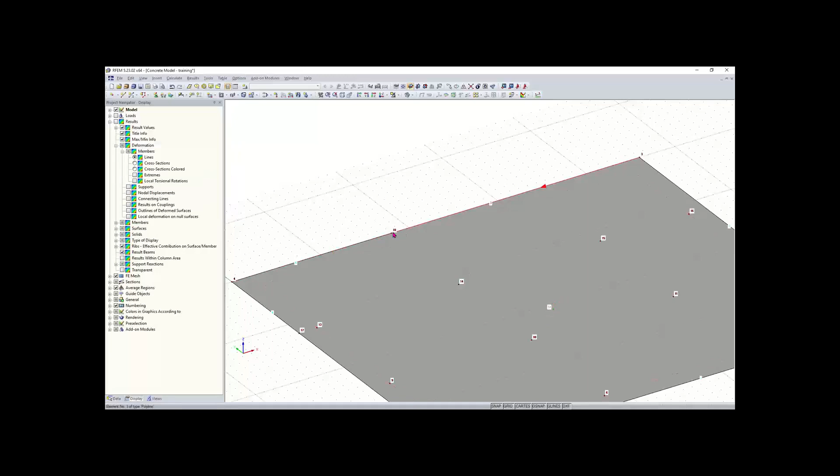And now we can do the same thing for this line up here at the top. I'm going to click on it, right click, select divide line graphically. And just to reiterate what graphically means, you can see I can just snap or place the node wherever I want to on the line using my cursor. I'm going to place it right here. This is going to be 28 feet from the start. So I'll place that, and now you can see that we have 2 lines with the node placed at 28 feet from the start. And again, if you're confused about the orientation of your line, when you hover over your line, this red arrow tells you the direction.

Now we can move on to creating our semicircle surface, which is going to be used for our spiral staircase over here. We can go up here to new rectangular surface, and instead of clicking this, we can hit this drop down button. You can see we have a list of different shaped surfaces, along with being able to do a polygon, or you can select the boundary lines of something and create a surface if you don't see the shape here. And what we want is semicircle. Similar dialog box, everything here is fine.

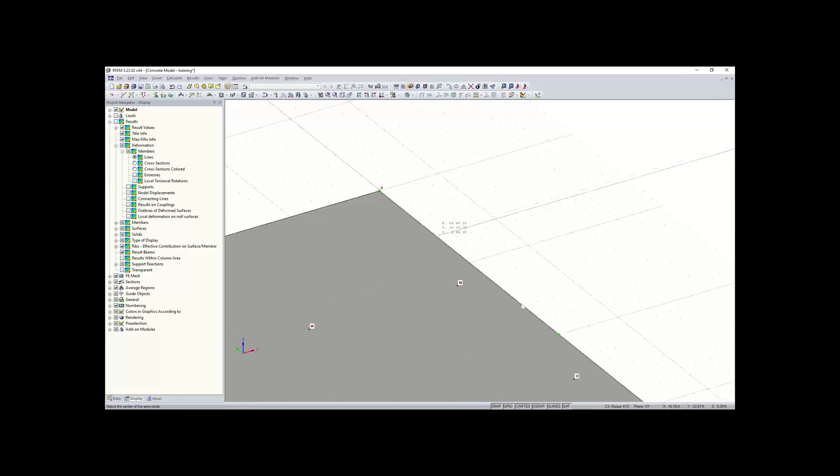We can keep that. And now I can just simply draw what is going to be the radius of the semicircle. The radius is going to be 7 feet. So I'll start at node 3 here at the corner. Actually, that's not where I want to start. I want to start 7 feet away from that node because you start from the center. That'll be at 4640. Or my mistake, that'll be at 4643. So we'll start at 4643, draw this so the radius is 7 feet, and we'll end it at the corner there. And now you can see we have our semicircle surface attached to our rectangular.

And now, after surface 2 has been created, we can work on our ceiling slab. This should be pretty easy since our ceiling slab is going to be basically the same as our floor slab. We can highlight our floor here, and then we're going to move and copy it. Something to keep in mind is that there's going to be a clear height. For this concrete building, there's a clear height of 11 feet between the floor slab and the ceiling slab. And we also want to take into consideration the thickness of these slabs.

So we are going to take half the thickness of each slab and then add that to our 11 feet. So taking into consideration the thickness, that's going to be 11.83 feet in the Z direction, and we're only going to make 1 copy. We'll click OK. And now our ceiling slab is created, which is not the correct height. So to change that, I can Control Z.

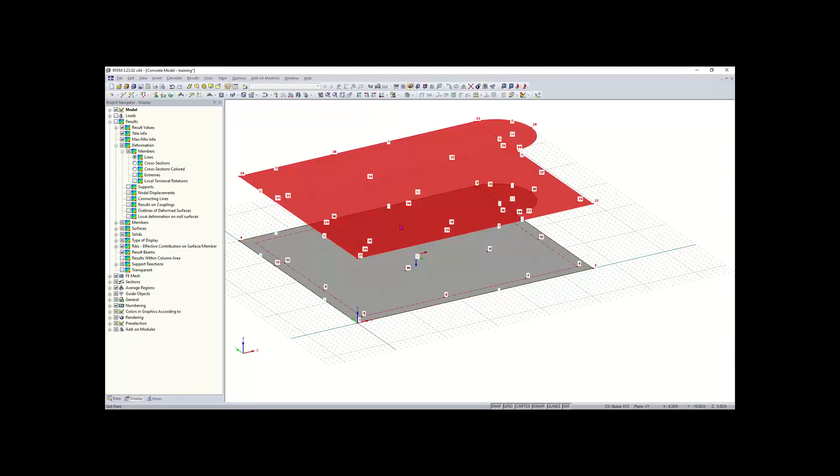And I'm going to redo that, move copy. Oh, I typed in 1.83, that makes sense. So 11.83 is what we want. And now our ceiling slab is created with the correct distance between them.

The next thing we want to do is to maybe check out some different views. So if we click on isometric, we get our isometric view here. Maybe we want to take a look at a different perspective, so we can check on our perspective view.

And then we can look at the reverse in the Z direction, and we can see if we didn't have perspective view on, you wouldn't be able to see that there's two slabs here. So if you turn that on, you can get a better look at maybe some elements that are lying on top of each other.

Now we want to create the walls between these two slabs. So to do that, we're going to first merge these two surfaces here. So what I want to do is I want to divide this line here. So I'm going to right click on line 16 here, and then I'm going to divide it. And I'm going to divide it by distance. And I want to divide it right in the middle.

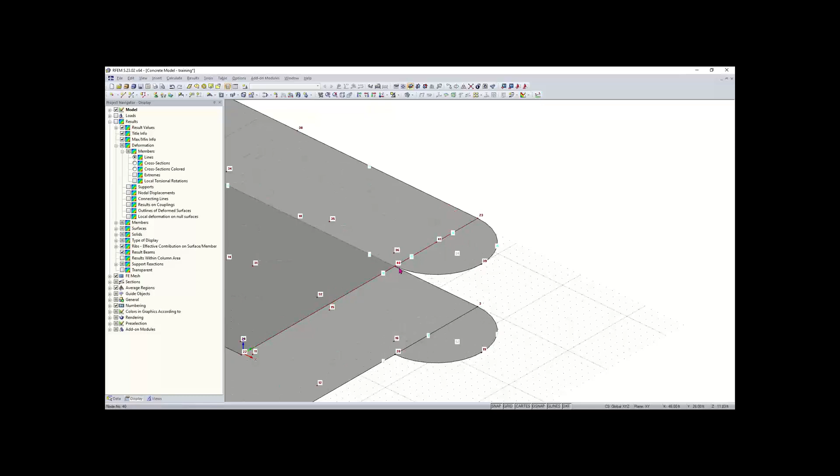And now that that's divided in the middle, we have two different lines here now, 16 and 17. And so now I want to connect this line to this line at node 40 here. You can see that this line is one whole line. So if I go up here to this tool called connect lines/members, I'll click on that and I'll highlight my node there. And you can see that what that did was split that line at that node and connected them, creating two different lines and an intersection.

So now we can delete our top surface here for our ceiling. And so we'll select the two surfaces by holding Control, delete. And the reason I did this was so that we can delete these two lines here, 16 and 17. I have two lines lying on top of each other, so I'm going to delete 16, 17, and 18. I just do that by clicking on them and hitting delete.

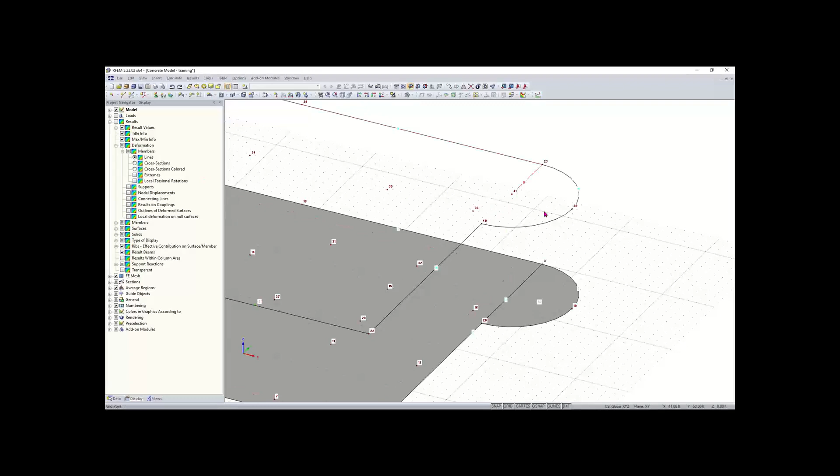We also can delete those lines by going to the project navigator, just for example. So if I wanted to delete these lines, I could go to data, and then I could go to lines, and then I could just hold shift and select 16, 17, and 18 and hit delete. And now we're just left with this outer boundary line and node 40 here.

So now what I want to do is just recreate the surface by going up to my surface tool here. And then I can hit this drop down and select boundary lines. So this is pretty easy. This is a very abnormal shape here. I want my ceiling to have a thickness of 12 inches. Everything else is good here. All I need to do is select this boundary line, and you can see that the surface has been generated based on that boundary line.

And we also kept node 40 here, which is very important, because now we want to add in an opening right here for our spiral staircase, and we can use node 40 as the center of that opening. So right next to the surfaces tool, we have an opening tool. Right now it's set to new rectangular opening by default, but if I click on the arrow next to it, I get my options for other openings. So I want a circular opening. And now I can just click on node 40 and automatically the circular opening will be set.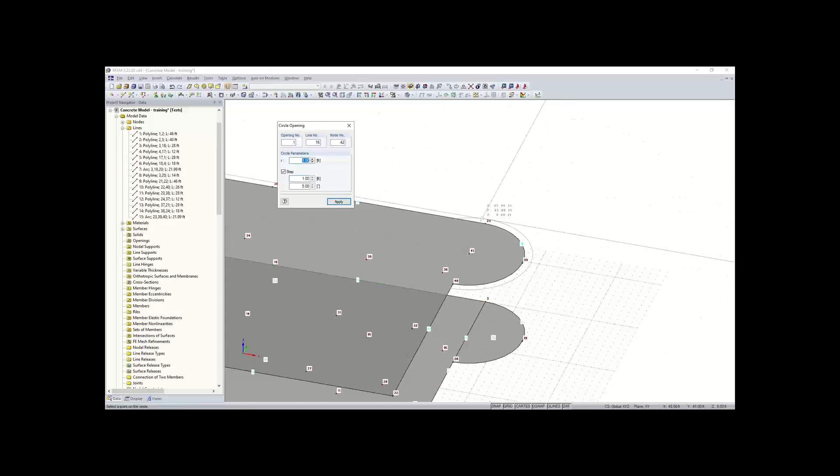So right now selecting this graphically is a little bit crazy. So what I can do is go up here to this window that I have open. I can select step and I can make the step just 1 foot. And now you can see that I can create my opening, and each time I move my mouse, it's just 1 foot. And so then I can also just type in the radius of this opening, which will be 6 feet, and I can hit enter. And you'll see that RFEM automatically integrates that opening into the surface here and gives us a nice symbol for our opening as well.

So I'll hit escape, and that tool will close out. And now we can get into defining our walls. So maybe I'll go back to an isometric view, and I can rotate the model so the staircase is in front of me.

And now what I want to do is create some new lines. And I also need to create some new nodes here on this line. So I will, well, I don't need to create a new node there. I can just go up here to new line. And basically what I'm doing is just connecting the floor to the ceiling with this line here, which will act as our wall boundary. And this is going to be about 7 feet away from node 20 here. So that will be at 4619. So we'll go to 4619.

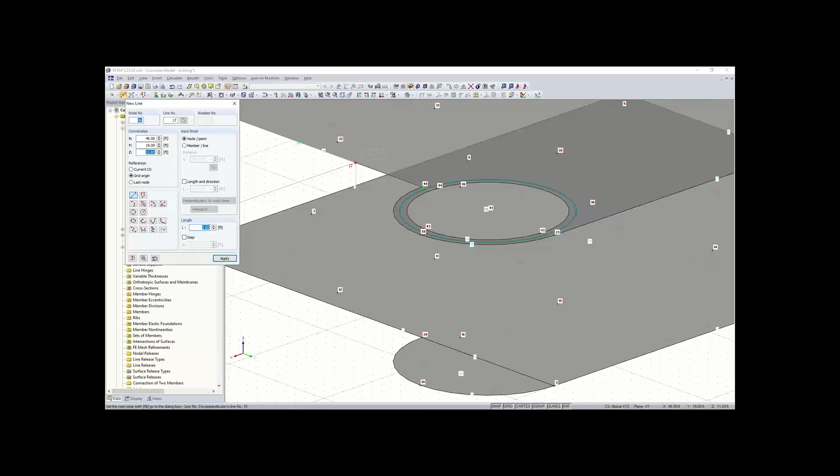I'll draw up to the line, and again, you get that nice symbol there, that snap point for perpendicular, kind of like AutoCAD, and there you go. Now that line's there, it's perpendicular, and now we just want to create some other lines for our boundary, for our walls. So the next one will be 12 feet away from node 3. So we'll go over here to, let's see, 3440. So that will be right here. And now I can go up to my line here, get that nice symbol with the perpendicular. And now we have those 2 lines for our walls.

And now we don't have to create any more nodes here, we can just simply connect our nodes here, 3 and 23. Let's see, 20 and 40. What else? 4 and 24. Oops. Looks like I created a line there. Control Z. I can go back up to new line and just connect 4 and 24. And then we also want to connect 18 and 38. And also 17 and 37 here. And again, these are just creating our boundaries for our walls.

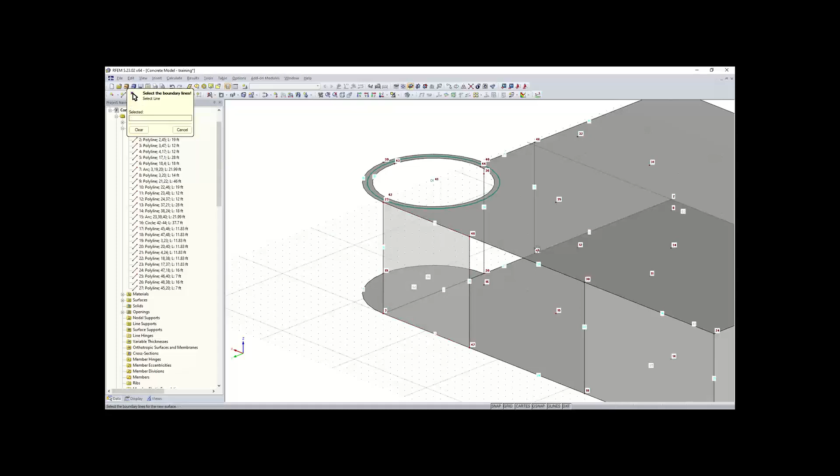And now we can create our walls. Pretty simple. We'll go up here to select boundary lines. And these walls are going to have a thickness of 8 inches. And everything else here is good. And now we can just easily select the boundary lines of the surface. So I'll start over here and I'll click each line. And keep in mind that you have to select the boundary lines as a polygonal chain. What that means is if I select this line, I can't just select the line above it. I have to select a connecting line and go around. I can keep doing this for the rest of my walls. I'll rotate the model. Another good hint for rotating is if you hold in Control and then right click, you can also rotate, which is nice. So I'll create these walls.

And then we need to create the wall for our staircase here. So to do that, since this is out of plane, basically this needs to be a quadrangle. So we'll go up here to this tool called New Quadrangle Surface, and this is going to have a thickness of 8 inches. We'll click OK, and then this is basically like selecting boundary lines. So we'll select those, and now our quadrangle surface is created there. Let's see, we created our walls.

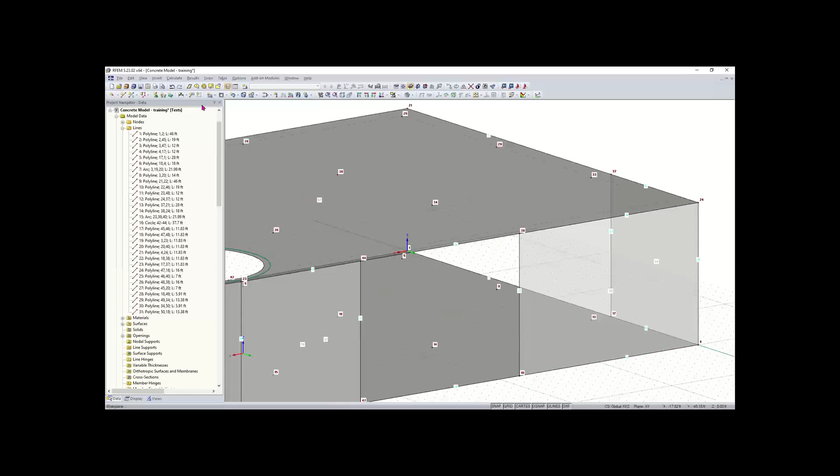The last wall we want to create is our inner wall here. So I'll go up to rectangular, and now I can just create a wall here for our inner wall, and that will go up to node 34. And that did not create correctly, so let's see. We want to go back, Control Z, and we want to make sure our work plane is in this plane. So this would be the YZ plane. So we'll go up to YZ. Again, you have your work plane options up here to change the work plane of your grid.

And then what we also can do is we can change the origin. So there's a button here called Set Origin of Grid/Work Plane. We can click on that, and then I can set the origin to node 18 here. And now I can draw that rectangular surface correctly. I'll click OK, and then I'll select node 18 and node 34, and now you can see that my wall there was created.

After that, we want to create our columns. I can set my work plane back to the XZ plane, and then I'm just going to connect these nodes that we created in the beginning with a line. So I'll pick node 5 and 25.

What you can do is turn lines into members by double clicking on them, then going to the member tab and then available. Once you hit available, it's going to ask what cross section you want this defined as. We'll go to import cross section library.

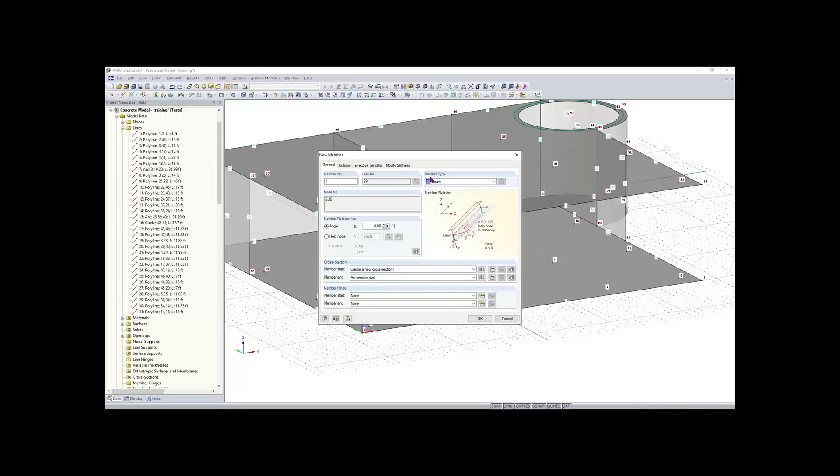This is going to be a rectangular parametric concrete massive section, with dimensions of 14 inches by 14 inches. Our material set here at the bottom looks like it's the older standard by default, so let's go to import material library and make this the newer standard. We'll click OK, so we have our concrete 4000 psi, hit OK again, and keep hitting OK through these dialog boxes.

Now you can see that my member here, my concrete column, that line connecting those two nodes, has been created or transferred into a column that we defined. You can also see this in the table.

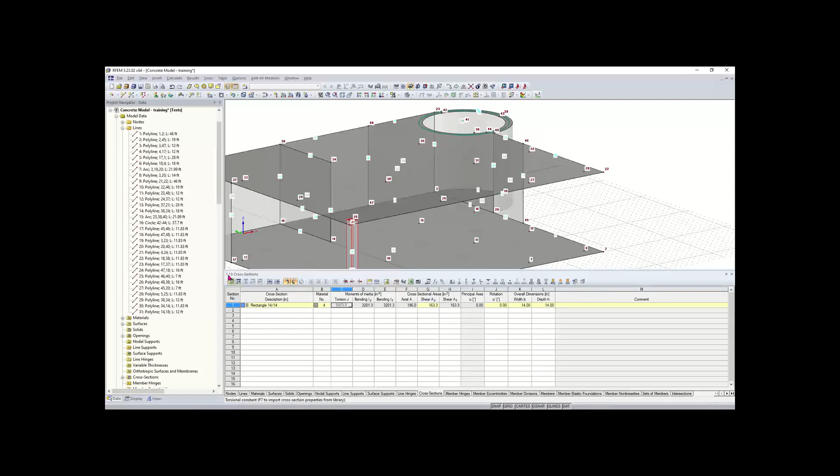If I turn on my table up here, maybe we want to look at our cross sections in our table. So we can open the table, go to members, and also go to cross sections. Under the cross sections tab, you can see we have our cross section listed, and we can also change this cross section from here if you'd like. You can also see up here what table you're in if you need to reference it - it's 1.13 cross sections.

So I will close out of my table, and now we want to create the rest of these columns. Instead of manually doing that, we can simply use the tool, highlight, hold Control, and then drag - you can see that will just create a copy. And there you go, now we have our first row of columns.

Another way of selecting columns is going up to the special select option here, called the special select tool. This allows you to select elements within your model based on these categories. So let's say I want to select members - I can activate that, and select all members, or select based on various options like material, type, or number. We want to select based on cross section if we want all of our columns, so we select based on the 14 by 14 cross section. I'll click OK, and now you can see all those cross sections have been selected.

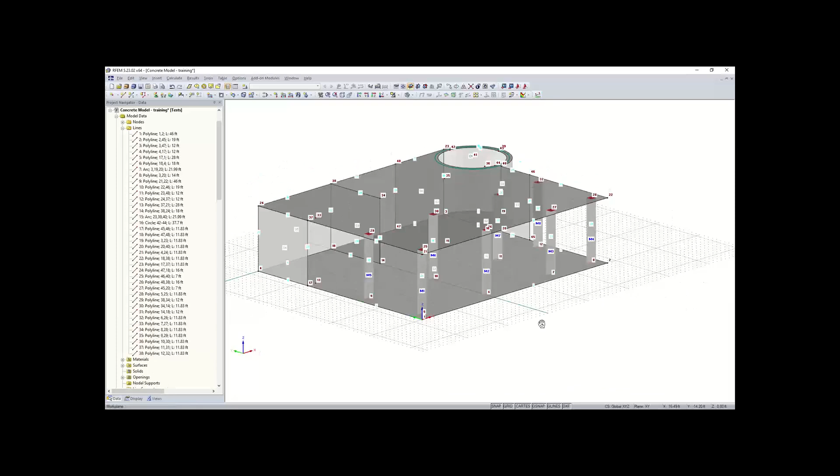This is handy because now I can easily hold Control, and all those are selected, so I just hold Control, drag, and drop, and now all of my second row of columns is created. Finally, we can do one more column - select a random one, hold Control, and connect 15 and 35 to the floor and ceiling there.

So the last thing we need to do for our model data is add in this downstand beam. There will be a downstand beam from the edge of this wall here, node 37, all the way to this column, node 35. This node 33 here is not needed, so I'll select that and delete it.

To add in this beam, I can simply repeat what I did for the column. I can use a line, or I could just go to new single member.

And then, under new single member, for this downstand beam, it's going to be a rib type. So I'll click on rib. And for the rib type, I want to go to edit member type. There's an edit button right next to the type there. We want to select the option on the positive Z, local Z side of the surface. You can see that's under position and alignment. So when I change these options, it'll show me the slab, and it'll show me which side my rib is going to be on, as well as my local Z axes.

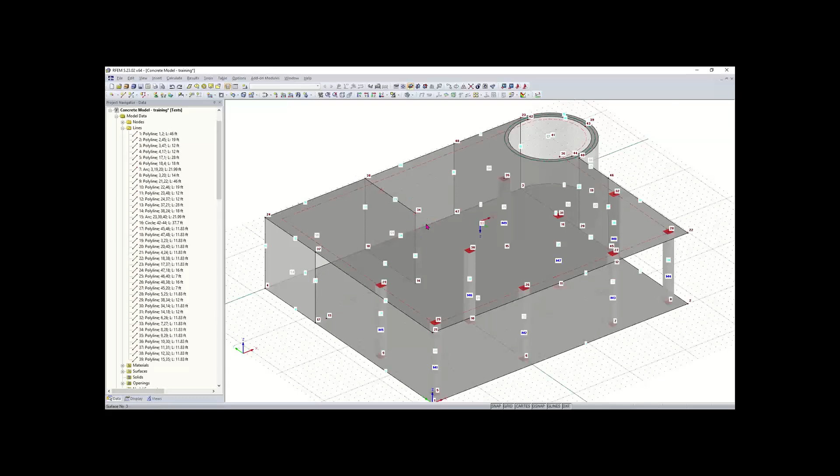And now we can draw. Now we can draw our rib, which is not correct there. Oh, I see. Okay, so what I can do is just exit out of that tool, go to new member, click OK. Need to redefine these. It's all good.

And now it's asking me for the line, so I will have to create the line. I'll connect the wall to the center wall there, and then to the column. I'll go back to my new members, click OK, and then I'll click OK again. Everything's defined here correctly. And then I'll select this line here, and now we have our downstand beam.

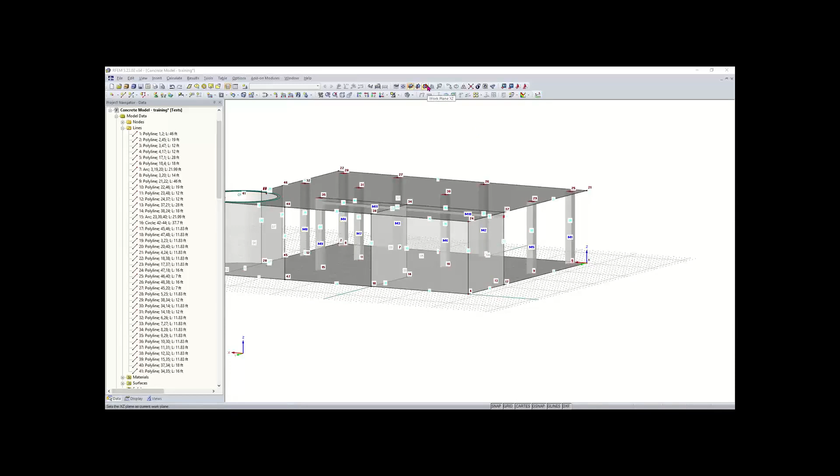So now that that's defined, the next thing we want to do is add in an opening to our back wall here. What we can do is go up here to our openings, rectangular, and before we draw this opening, we need to make sure our work plane and origin is set in the correct orientation and position. So this work plane is going to be in the XZ plane, and the origin is going to be at the corner here. And now we can draw our opening, our rectangular opening.

And that's going to start at the top left here at the coordinates 1408. We can snap to grid points right here, and then we can just simply draw that. And that's going to end at 503 right there. And now our opening has been created, our back window there.

And the next thing to do is to add in supports for the structure. So all of the surfaces and all the model data there is created, we just need to add in the supports. So the supports are going to consist of line supports. We're going to assume that the foundation over here on this left-hand side is adjacent to another building, so we'll add in line supports there.

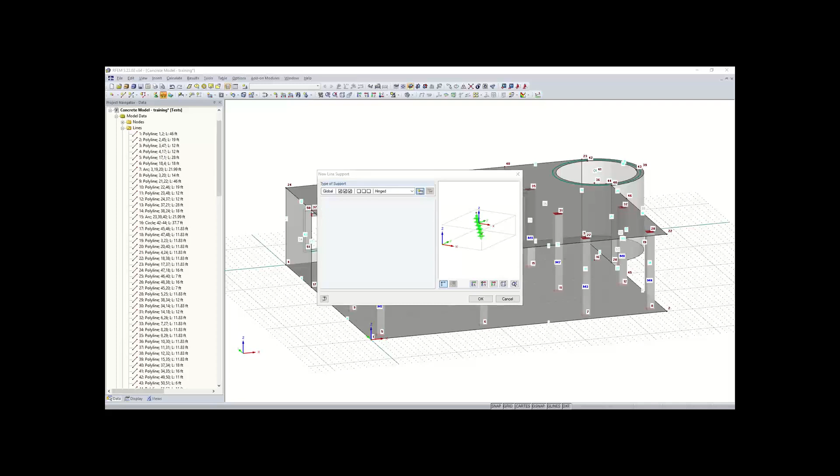We'll go to new line support, create a new type of line support. The only thing we want to be fixed with this line support is the translation in the Z direction, so all of these will be released. The translation in X and Y will be released, rotation will be released. The only thing we want is just support in the vertical direction. So we'll click OK, and then I can just simply select my lines here and add in that line support.

So the next type of support we want to add is a surface support, and this will be the foundation for our floor slab for surfaces 1 and 2. So I can just select surfaces 1 and 2, and go up here to new surface support. And within here we can define our surface support.

So we can just simply create this foundation basically. Within the Y translation and the X translation, we're going to have a spring constant of 64 kip per cubic feet, and in the vertical direction, we will have a spring constant of 640 kip per cubic feet. And that's just going to represent - well, Y and X are going to represent the shear capacities of the surface, and then Z is going to represent the soil.

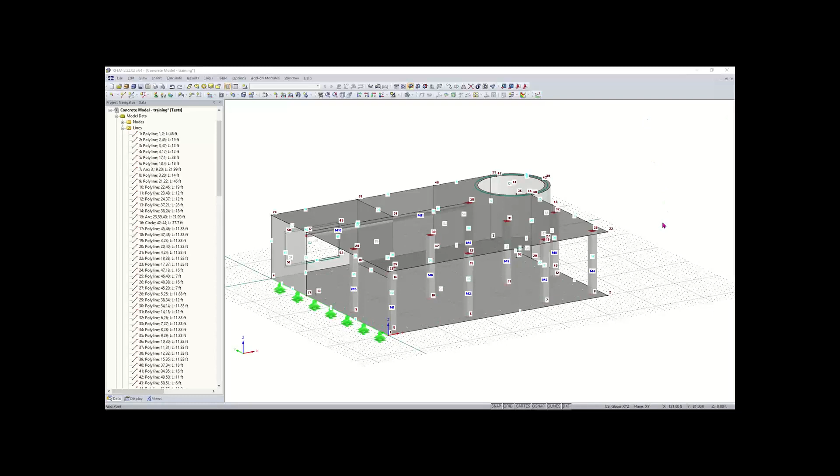And then we can move on to adding stiffness modifications based on the ACI standard. But it does look like we're running out of time a little bit here, so I was wondering if we could take this time at the end for a discussion, if anybody has any questions so far that they'd like to have answered.